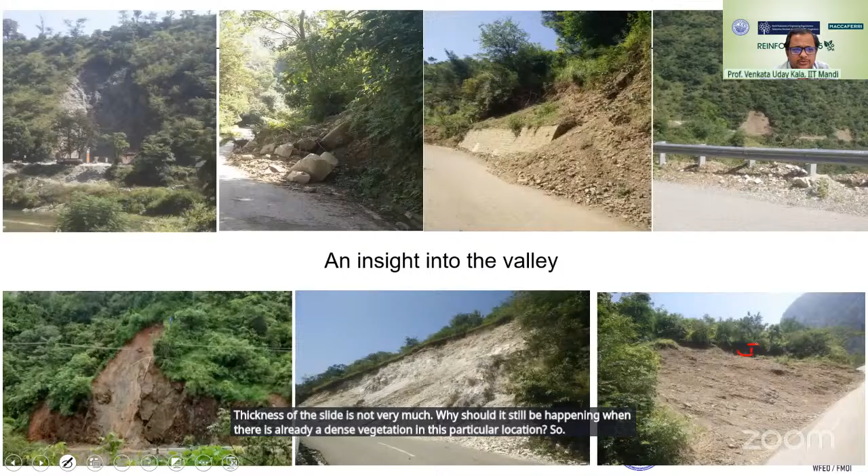So to dwell into this, we started looking into the literature. We started to understand, and it's a well-applied situation, that vegetation is definitely one of the major reinforcement processes in the soil, which helps the soil to be bound, located in place, and also controls soil moisture movement inside and outside the soil.

Then there are various methods which have been brought in under the name of bioengineering, about how slopes can be constructed using nature-based solutions, of different types. These three images, well published in literature, talk about the plant, the root, the branch, the leaves, and the association of how each of them contributes.

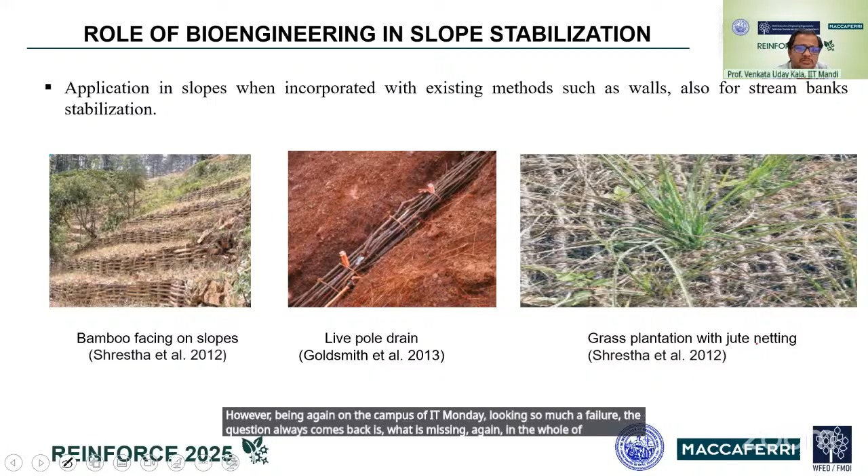However, being on the campus of IIT Mandi and seeing so many failures, the question always comes back: what is missing in this whole setup? That was the major objective, and when we looked into the literature, it clearly shows that there is something a plant requires from the soil, and because it is nature, the plant gives back something to the soil. In between, we talk about the life the plant is getting from the soil, and the strength which is coming back from the soil to the tree.

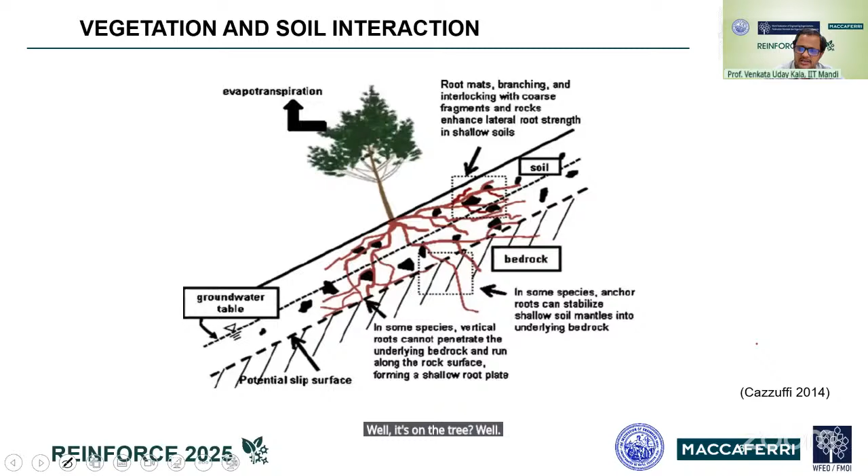Well, this is established, and a lot of people started to look at it. There are many root reinforcement models which started as far back as the 1960s and 1970s. People started to talk very much in the mechanics and scientific domain of how roots interact with the soil. Different models, different methods, different software, different options are available these days for the engineering. However, the concept we understood is how the part of nature-based solution is missing the part of engineering.

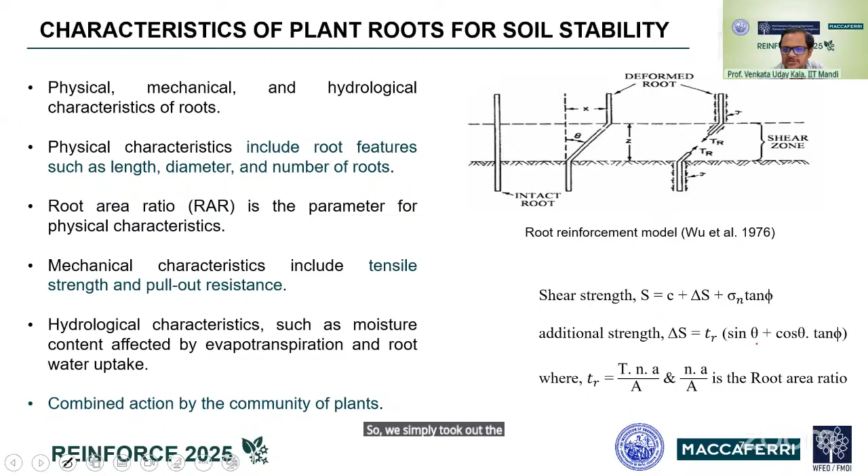So we simply took the same concepts of nailing and reinforcement, and we tried to see how that can be applied to different species of plants, and come to a concept of engineering to conform to bioengineering.

So we identified very indigenous plant species of the Mandi domain. I did not want to bring in species or plants from outside this particular area. I did not want to bring in the unnecessary aspects of invasion of different species. However, a few of them were already invaded almost 500, 600 years ago. That is very clear to those who know this domain.

I'm sure you are looking at these 18 plants and looking for one particular species called vetiver, which is missing from the list, or should I say, did not make it due to two constraints. Number one, vetiver is not a very regular or indigenous plant of this Himachal Pradesh region. Number two, thanks to NIDM and Professor Chandan Ghosh, he has given me almost 15 different types of vetiver species, which we have planted in our bioengineering botanical garden.

Unfortunately, none of the vetiver has given me anything better than half a meter of root. So the soil is clearly telling us not to bring vetiver here. I'm not ready to take it as a regular plant in this domain.

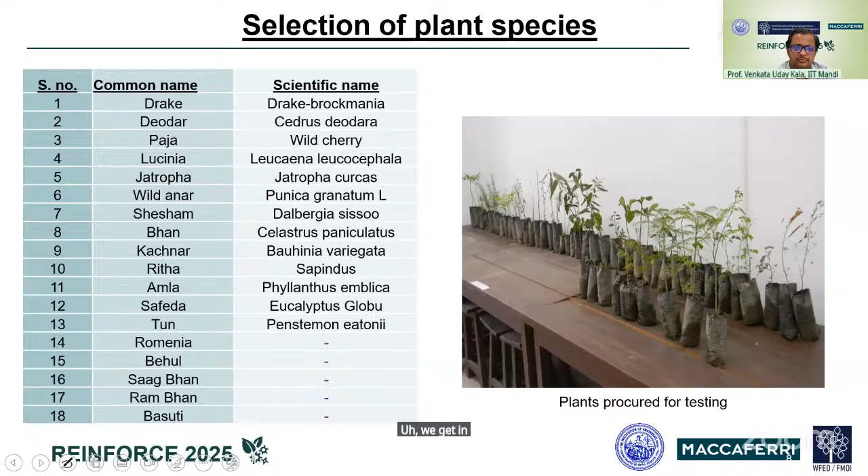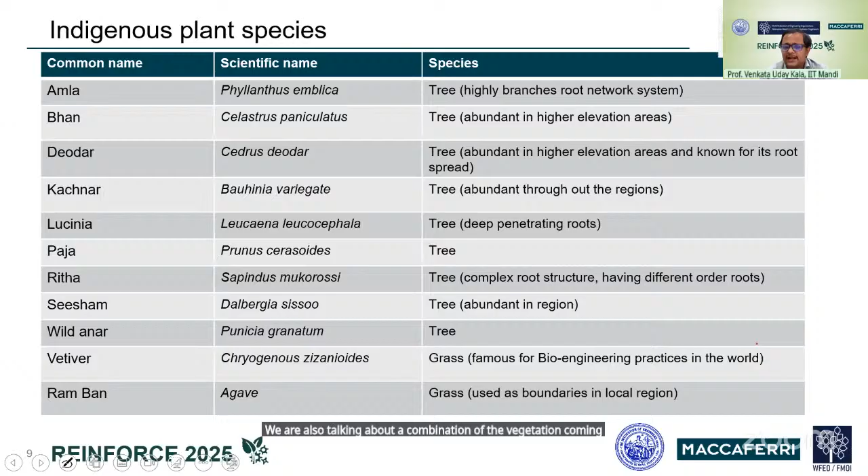So we continue with these particular 18 plants. We get the species, get the plants we have planted in our trees, and try to identify which type of species is more abundant and what type of structure it has. Fortunately, we are not simply selecting trees; we are also talking about a combination of vegetation coming in as grass, shrubs, and herbs in the whole of this expectation.

So we brought in the comparison between a soil nail and a plant root. When you look at it, a soil nail is very simple and easy given the conditions, since it has a fixed diameter.

The diameters are varying, not only varying in the structure, but also varying with respect to time, varying with respect to the location of the plant itself, availability of water, availability of geological conditions of the soil, and added to the environmental aspects, the roots change with respect to time and conditions.

Then they also have variable strength. It's not that the whole root gives you only one particular strength. The roots change their strength along their length. Orientation and shape probably gives you the best of conditions here, because it enters only into the void spaces and holds or grips the soil definitely better than a regular drilled or grouted nail condition.

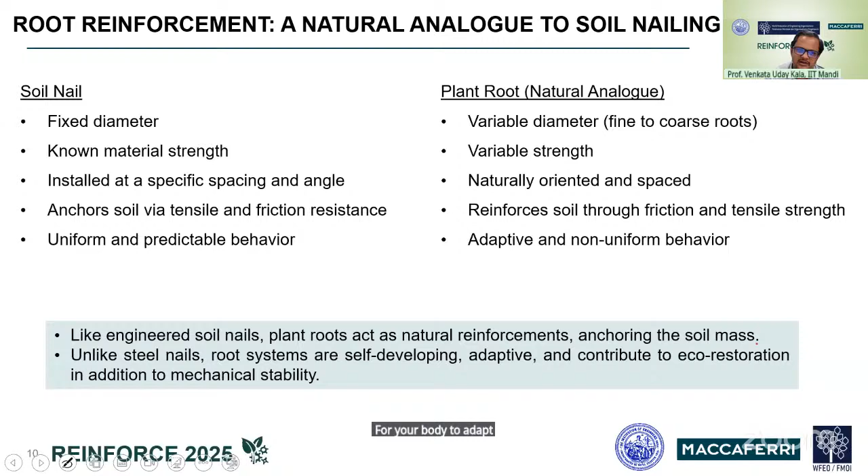However, I bring into the condition that when we talk about bioengineering, we are not talking about a reinforcement material or an embedded material, it is considered more a remedial measure. It is more like Ayurveda, where you need to spend that amount of time for your body to grow naturally, to adapt to the situation and give inner strength. That is exactly the concept we try to look into when we talk about the different roots and their structure to the soil and thereby the reinforcement.

We selected different plants, as we discussed in the last slide, with different diameters, different roots, different webbing culture, or the 3D structure if you look into this. And if you ask me what is the root diameter, then I have a number of diameters.

Some of the plants or species have a taproot, less taproot, higher taproot, more fibrous root, or no presence of any taproot at all. These are all natural, and it's expected that most plants which have a taproot or fiber root are going to continue with the same condition, unless some geological formation changes the look of the plant itself.

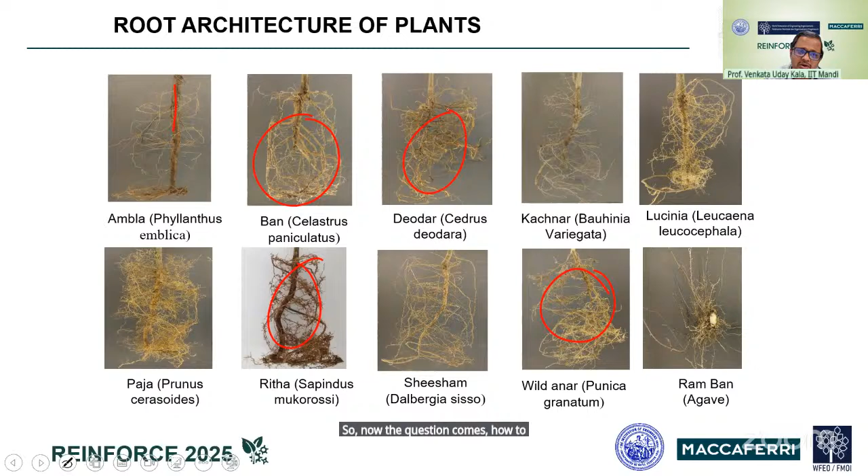So now the question comes, how to characterize or quantify these particular systems. By using the simple existing system, we understood that we are going to add a component of apparent cohesion into the system to see how the strength is increasing in the plants.

The research is ongoing, as we discussed, starting from somewhere around 1970, 1960 itself. It has already been discussed quite well in the literature, saying that RAR, what we call root area ratio, is a major factor, which talks about the architectural parameter. Whereas the strength of the plant or the root itself is a major component, which will also add strength to this particular component of shear strength. All these components are again well established in this particular domain.

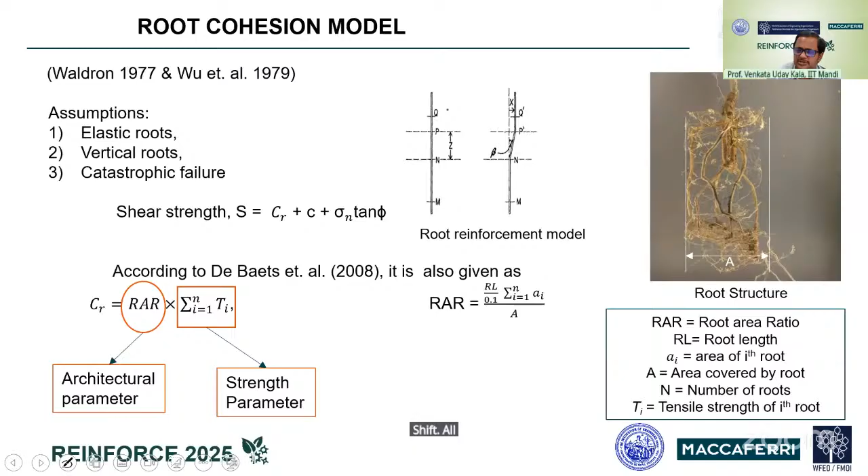If you just look into quick literature, I'm sure you're going to get a lot of idea on this aspect, where we talk about bringing this root in the soil in the lab, we try to disaggregate the different types of root, different diameters, different lengths, different grip lengths.

Then we use micro UTMs, trying to get the stress strain behavior of this particular material. And if you can appreciate this part, the error bar in all these sets for a given diameter, for given conditions, for a given strain rate is too high, because, as we are discussing again and again, it's a natural material and it has its own mode of failure and types of failure.

So we started to establish this particular aspect. Finally, when I look into different types of these systems or plant species, almost equivalent in number, when I'm trying to find them, they are definitely forming as a cloud, while only a few of the plants are giving me very high strength in this particular aspect. Whereas the maximum of the species are giving me a controlled cloud, what I call a very normal or mediocre strength. So we thought to understand how to develop this particular aspect.

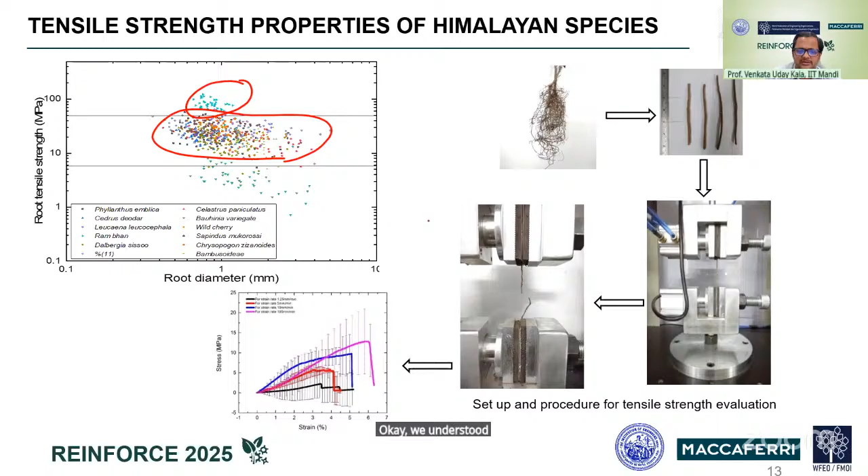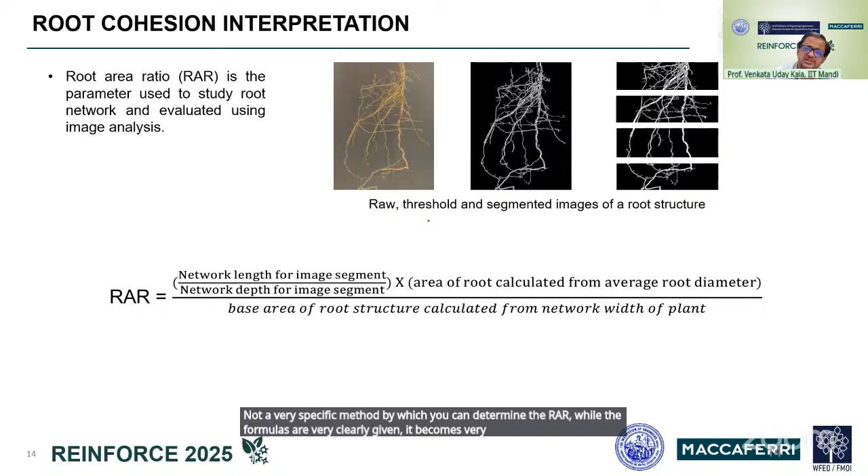The second aspect, strength, is okay. We understood the strength part of it, the variations and opportunities. The moment you come into this RAR, called root area ratio, it's difficult to get into a concept of diameter, so RAR has been introduced. Again, when we say RAR, we don't have a very specific method to determine it. While the formulas are very clearly given, it becomes very difficult, but thanks to image processing and improved image processing over time, we are now able to segment the image of a plant or root.

To understand how this root area is changing with respect to the structure, probably in the next slide you will get an idea why this is very important. So we also tapped into root area ratio, how much of the root can cover a particular area or domain when present inside the soil. Now going back to the De Baets 2008 option, we can quickly find out what is the improvement in cohesion because of the presence of the plant root, corresponding to what the soil already has as an inherent property. So this is an extra component added to the cohesion component of the soil.

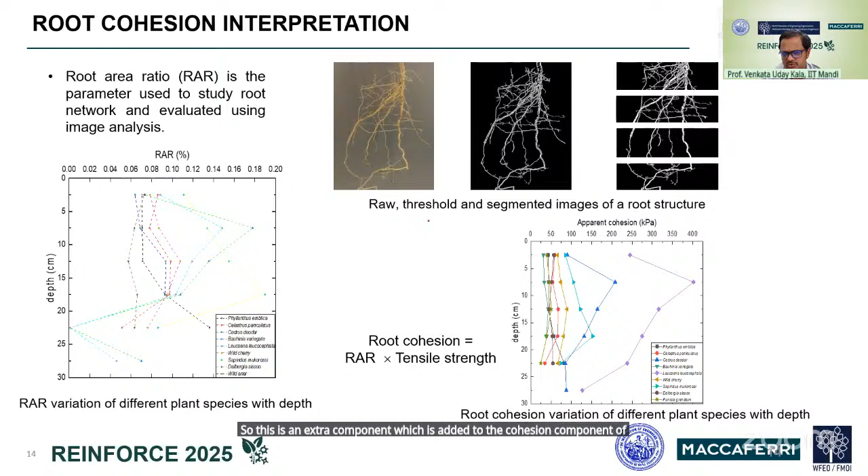So now when we look into the RAR profiles, a simple philosophical idea comes in: this RAR can tap a different opportunity or application potential. If the strength is not going much into the depth but giving slightly good strength decreasing over depth, I say this is more of a surface erosion or superficial application species. Whereas if it's increasing over depth, I see it as having a good opportunity of being a reinforcement material, the way we talk about soil nails. However, don't forget we cannot go to the depth a nail goes, so feasibility is a major aspect to look into before talking about this.

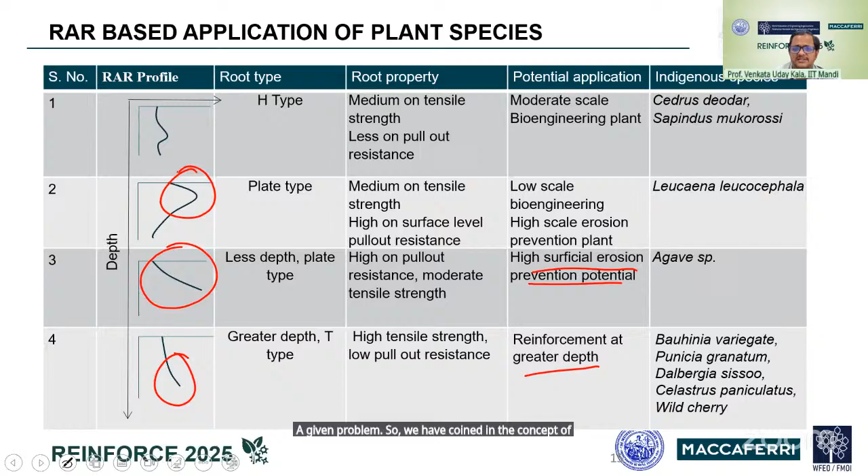So again, you can see some plants trying to give slightly higher strength on top, but the moment it goes down, it taps different conditions. So we have to understand it's not that a particular species is going to solve a given problem. So we have coined the concept of community of plants as we are moving forward. For this, we wanted to understand, rate, or rank a particular plant, how to choose that particular plant or species to make it more workable in this option.

So we try to rank the species based on two components: RAR and tensile strength. Undoubtedly, both combined give us root cohesion itself. So we can understand how much of that particular root and soil are contributing to the extra component of cohesion as root cohesion.

Based on this ranking, now we are coming to a concept that if this is the arrangement of the plant, if it can be planned such that higher tensile strength material goes in between, or a combination like we are trying to depict here. However, higher tensile strength plants are more present on the top and bottom line, and slightly lower tensile strength but higher RAR plants are present in this particular domain, where the root spread is also confined or controlled. So we are talking about a hybrid system which can be developed.

It's not that we are simply saying go and plant one species across the whole slope. We are talking about the condition of whether you can split the species so that we are maximizing the effort from this particular option. So we are trying to see how we can perform more numerical models by which this particular aspect can be strengthened, using the concept, going to experiments, and trying to find out.

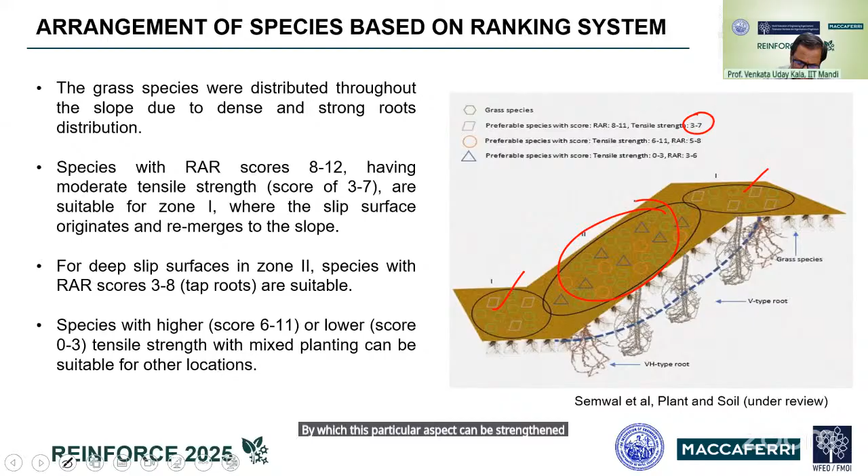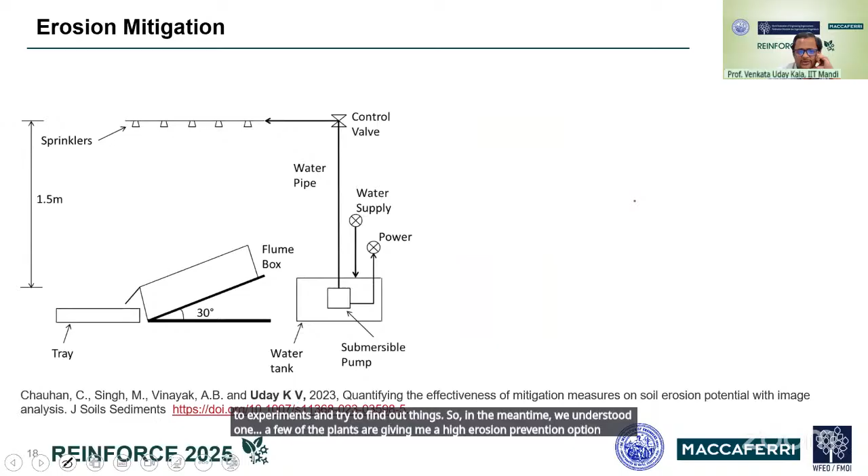In the meantime, we understood a few of the plants are giving us a high erosion prevention option, so we tried to catch the low hanging fruit. We brought in a simple erosion setup, trying to set up an erosion flume which gives us an option of segregating.

I used image processing to find the time rate of erosion happening on the site. By this, we can quantify that there are few conditions in this particular soil which are inducing splash induced erosion - the moment a raindrop falls on the soil, it loses from its place and goes on.

However, few of them, while not showing splash induced erosion, are showing runoff induced erosion, which means over time when the rainfall is continuous, you will see more erosion happening after a particular time. So we tried to split these two and see which particular material, especially the different grass species, matters in this thin or superficial condition.

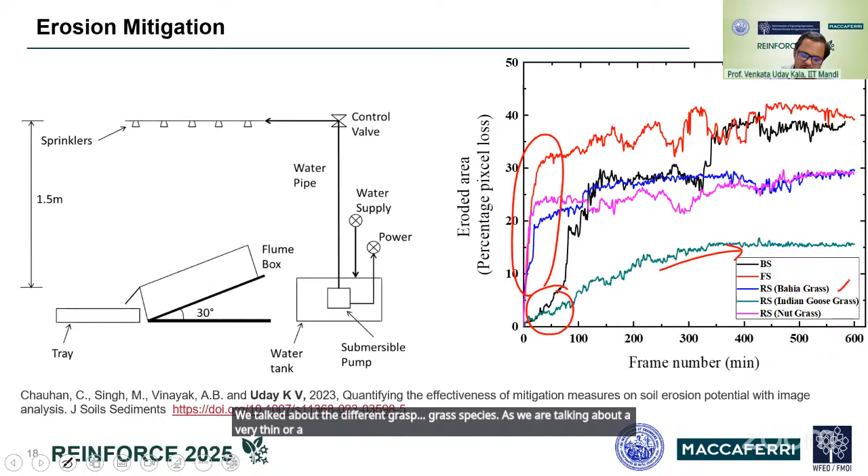We tried to quantify how bioengineering can control this particular condition, where initially the soil gave something around 4 kg of sediment at a given time and given rainfall conditions. The moment we started to use a simple fiber, we started to see a reduction in this material.

While going to the grass, we had two options. One is not to use leaves. So for this grass condition, I did not use the leaves, I simply used only the grass. I planted the soil in my flume and removed the leaves from the top.

Why am I doing this? Because probably it will come in the next stage. The simple cutoff is I want to still see the splash induced rainfall coming into the picture where there is no leaf, so the raindrop still has the same potential by the time it touches the soil layer. My grass is now acting as a reinforcement material only - I'm not stopping any energy going into the soil. So there I can see a quick reduction in the sediment.

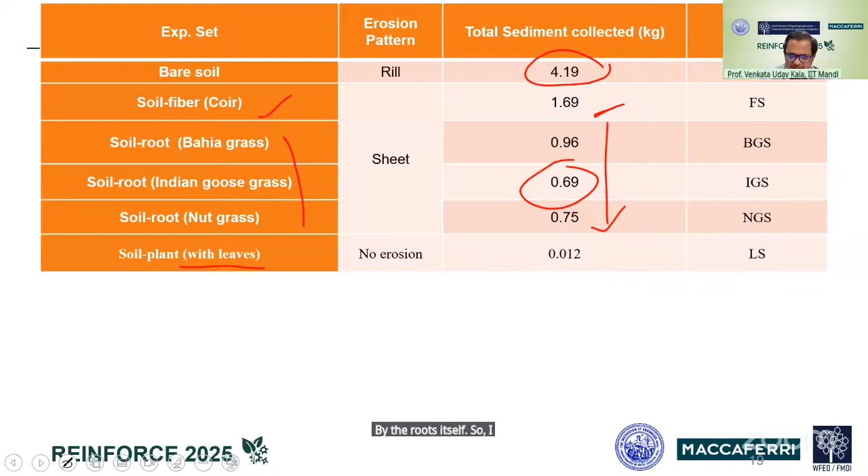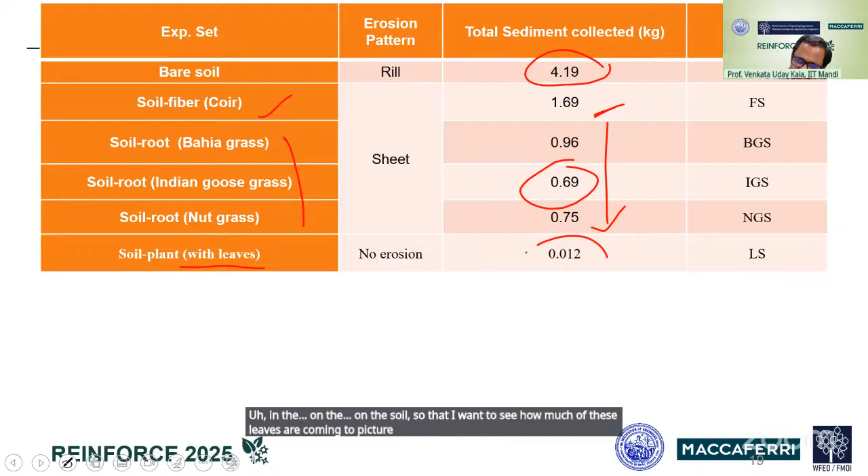What am I collecting in this domain? The moment I add the leaves for the given grass, say for example, Indian goose grass gives me the least erosion by the roots itself. So I allowed the leaves to be present on the soil, to see how much these leaves affect the picture, and the results are definitely spontaneous.

It shows that most of the erosion we now understand is coming from splash induced erosion itself. So we reduce the splash by using leaves, whereas runoff induced sediment is also reduced because of the presence of the grass itself. We have come up with this particular concept where you can very clearly see the changes across this thing.

However, I hope it's no point showing you an image with a plant or a leaf, because you cannot see any soil below, and the sediment itself clearly shows that erosion can be very well controlled using grass leaves - sorry, by a simple grass, which is a very common grass across India. I understand that is why it is called Indian goose grass, which is a very good option.

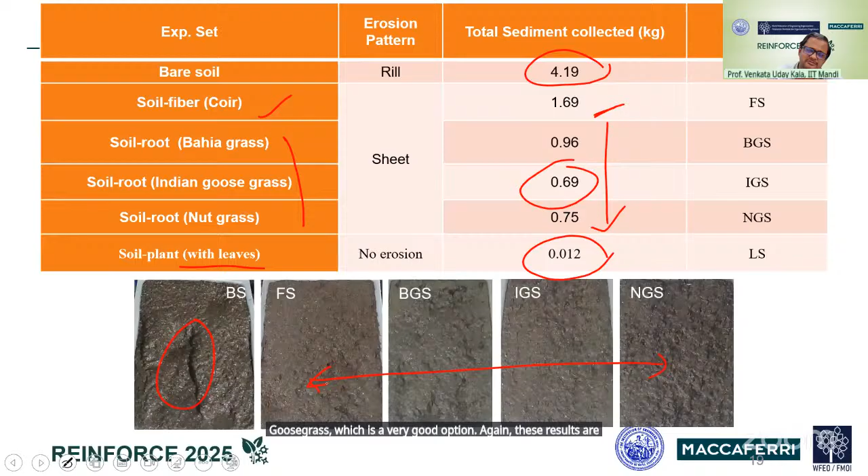Again, these results are confined to the amount of soil and the plants which you have selected for this particular study. Finally, if I have to conclude, what we have developed is the whole system of the plant working very well for reducing the effects or contributing to the improvement in soil strength.

Starting from the leaves, as I just told you, the leaf is the component which is looking at the soil and water balance, further avoiding the intensity of raindrops or absorbing the energy from the raindrops, so they don't reach the soil directly.

The remaining stem is the one which, at the surface level, gives me a rate of reduction where the soil or sediment transport will no longer happen because of the intersection of the stem at the interface. And finally, the roots act as a reinforcement system into the ground, trying to avoid the moisture coming in.

And before this, we also talked about the importance of different species getting into the picture to reduce the effect, or the efforts of the species to improve the strength of the soil and thereby reduce the surface or subsurface, shallow landslide conditions in these particular domains.

So this is what we have understood with the plants. Now, quickly, with the paucity of time, I'll move to the other topic, which I call biocementation.

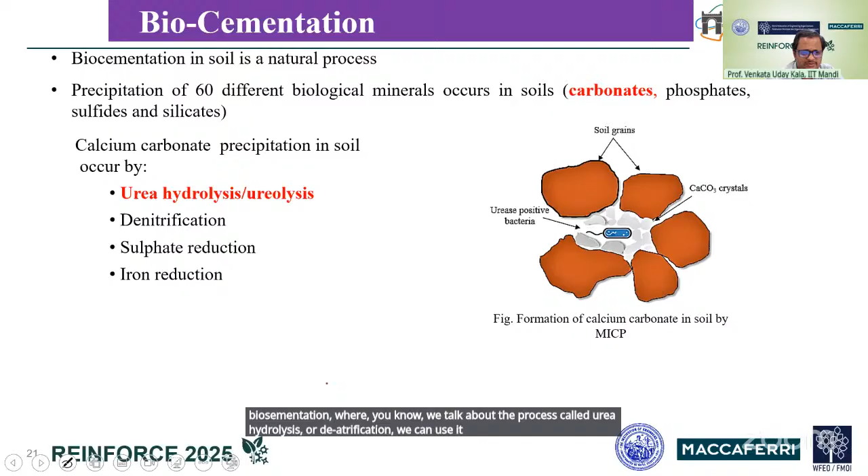These days biological or nature-based solutions include a lot of bio-based materials, thanks to improving biotechnology, which creates conditions where we can bring in species of bacteria or enzymes from the soils or the plants to make it more workable for us. So we started looking into biocementation, where we talk about processes like urea hydrolysis or denitrification. We can use it for sulfate reduction, and we can use it for iron reduction.

So we can treat the soil, or treat the problem of the soil, within the soil itself using this concept. People have been using these concepts for decontaminating soils and improving soil conditions. I'm sure you've seen videos of China treating deserts and increasing plant cover in the deserts, etc. So if you can treat the soil with a particular species of bacteria, you can improve the nitrogen content in the soil and give life to the soil. These conditions can be easily developed and solved. This is what we tried to understand.

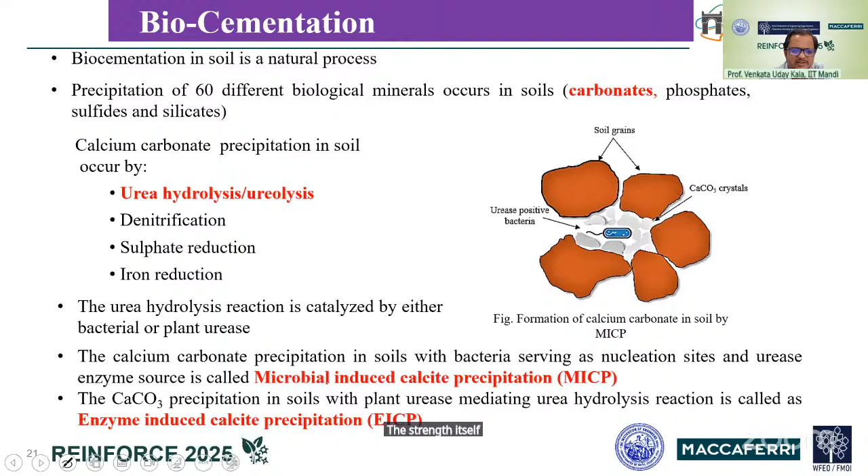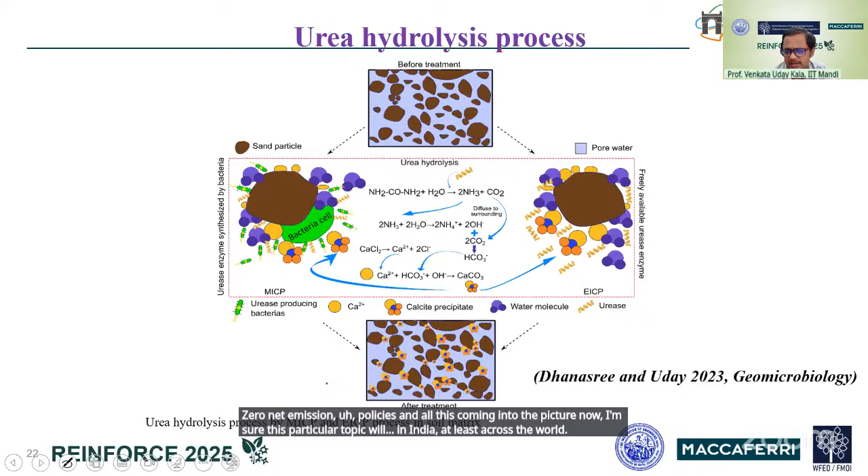However, I wanted to look into how these aspects of soil can improve the strength itself in the soil, which is what most geotechnical engineers look at for strength and stability. So we tried to understand how bacterial cells create a condition in the soil by which we can increase calcite precipitation - what we call cement addition or lime addition to the soil, which have become unsustainable given zero net emission policies. This topic will, in India and across the world, improve conditions where we talk about natural ways of releasing calcite, or in other words cement, directly into the soil without any process of hydration for strength gain.

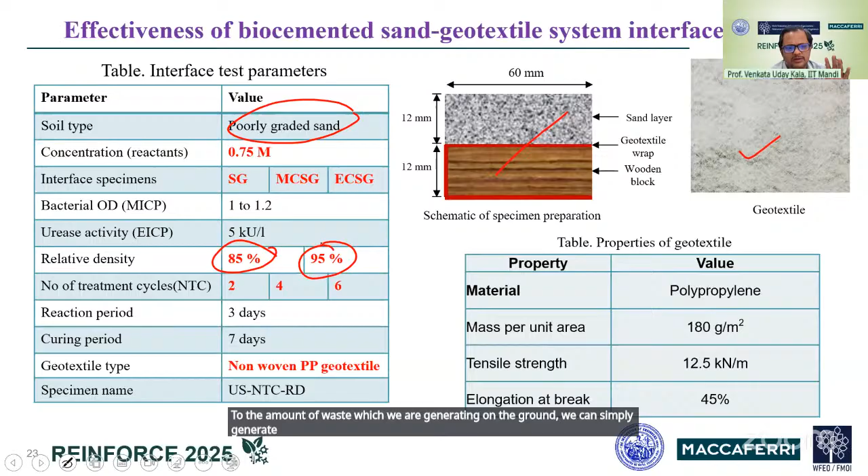So we took out the solutions and tried to understand how the bacteria creates conditions to release calcite directly into the soil. I applied the material to the soil grains and left it for some time so that calcification happens inside the ground. And we have different methods for this.

First, I choose to only quantify or look into the cementation in this. Second, I try to only look at the biocement in the geotextile. And third, I'm making it as a whole system, percolating the bacteria into the ground. So I'm talking about three options: independently geotextile, independently soil, and as a combination, trying to see how I can biocalcify the whole material.

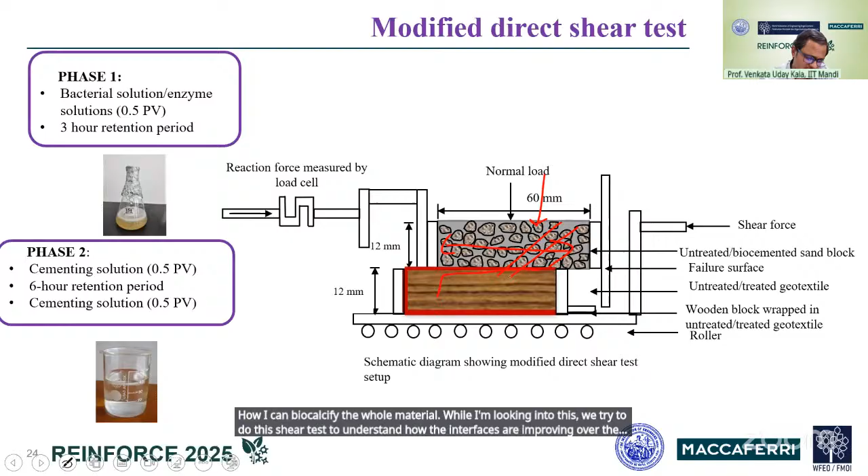While looking into this, we do shear tests to understand how the interfaces improve over time, before calcification, after calcification, and during calcification. We develop an interface like this. When shearing, you can clearly see the bacteria I put into the sand have started to make this sand into a mortar, improving the shear strength and interface conditions. We started with a poorly graded sand, which has now been converted into sandstone, improving the interface.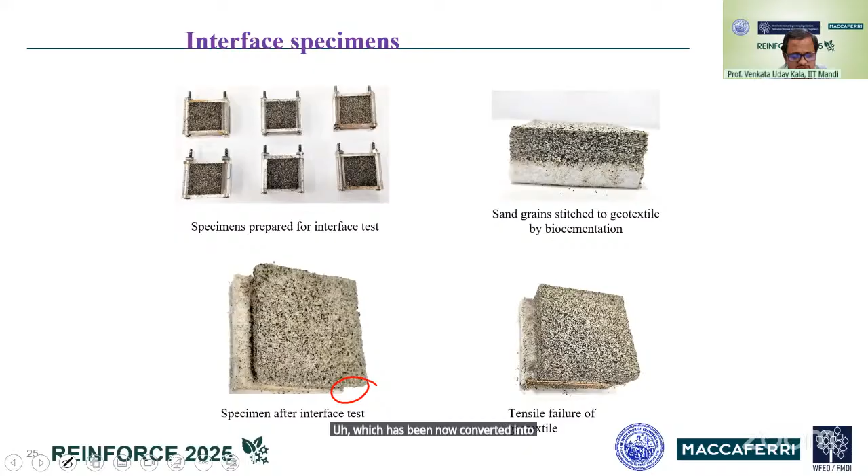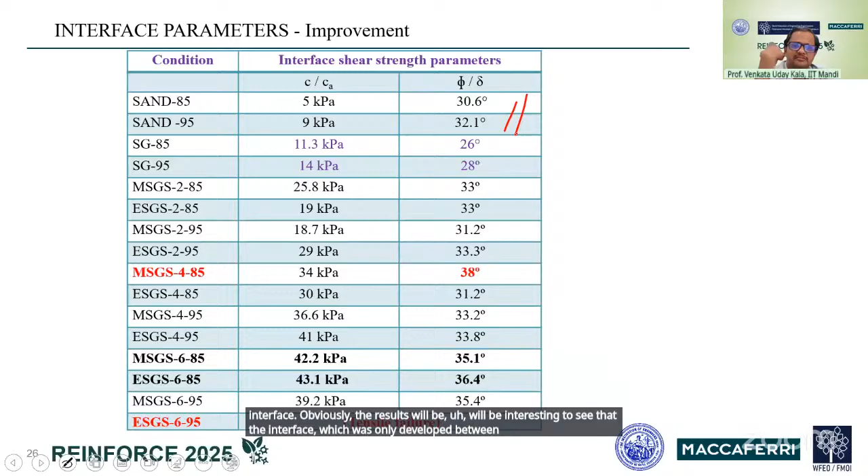The results are interesting: the interface between the sand was roughly 30 degrees. Don't mind, I'm talking about the peak interface conditions, so you'll see such high values, while values can be comparatively lower as we move down. However, you can see the increase happening from the 30 degree interface to almost 38 degrees as biocementation improves the condition.

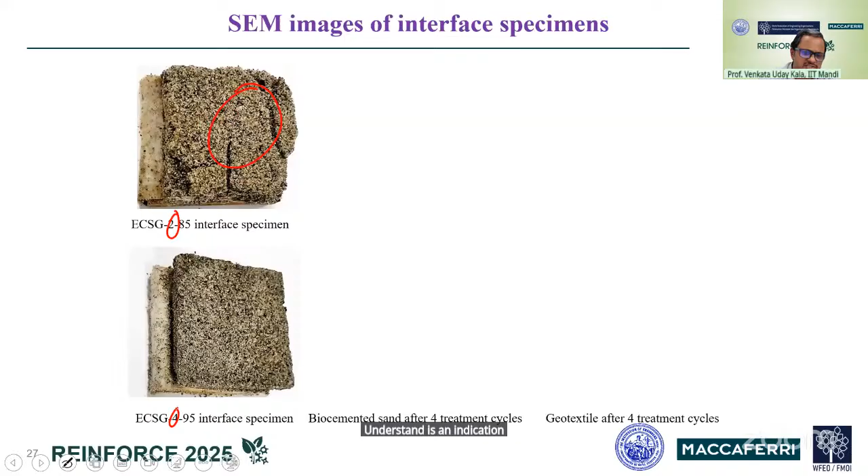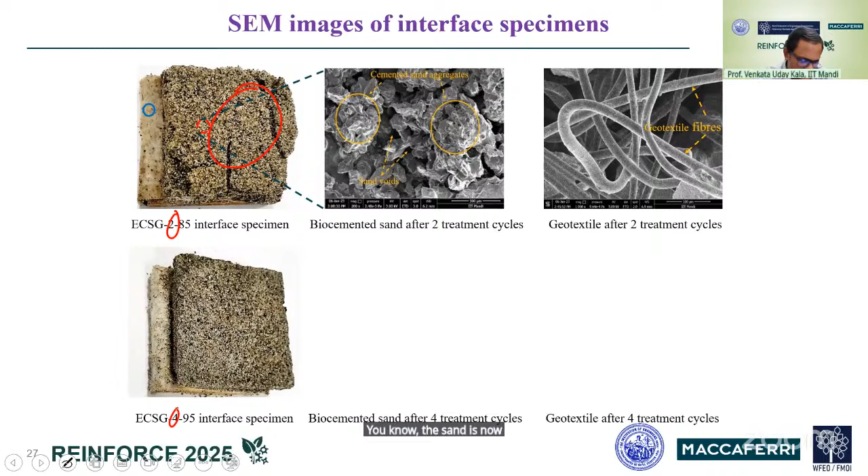Further, when you look into this interface and the type of failures you might see, the sand and soil interfaces clearly show this. For example, this is the place where I have a lower amount of calcium. If you are seeing 2, 4, 6, then 6 is the point where I have the highest amount of structure. These are the geotextile fibers seen on SEM. The moment you look into the biocemented sand, it is now coagulated, and you'll see a mortar-like picture.

Whereas if you see the same thing happening here, when I'm looking at the system itself, the bacteria started to also enter into the fiber and began to reinforce or bind the fiber itself. So now I'm talking about a stiff geotextile and stiff sand interacting with each other, which is where you saw the 38 degree interface at this cycle.

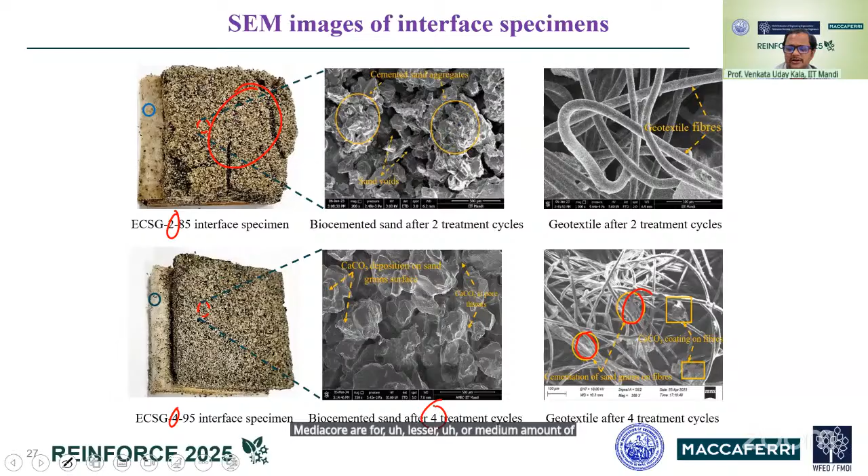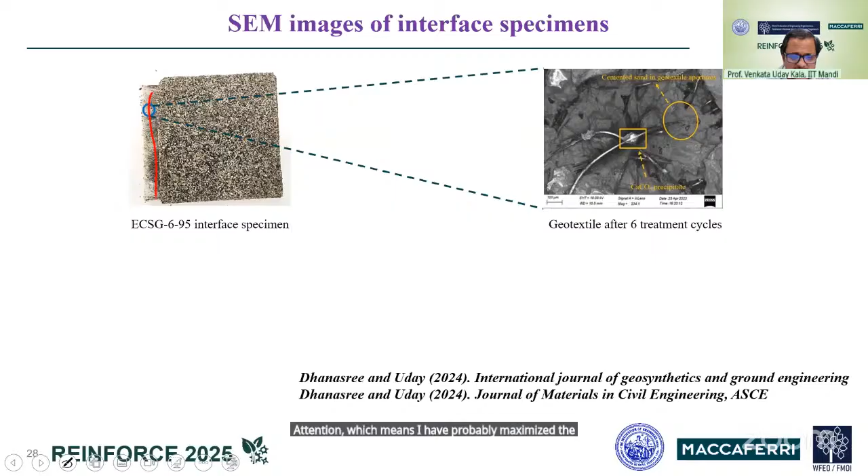When talking about a medium amount of calcite generated here, and then moving to 6 cycles, meaning the highest amount of calcite present in this experimental process, you can clearly see the geotextile now gives a tensile failure. Instead of the shear or interface failure, it has pulled the geotextile to fail up to the extent of tension, meaning I've probably maximized the interface condition, which we'll try to optimize further.

So the second option we quickly tried: it might be difficult in the field to put bacteria, soil, and all these conditions. So we tried to reduce this down to just the geotextile itself. We thought, can we play with the geotextile itself? We added some bacteria to the geotextile and treated it, and we could obtain a quick outcome where we made the geotextile slightly stiffer and rougher on the interface.

To be clear, this is not cement, this is bacteria, or just a bacterial or natural process in the field, so it is not going to give major effects from these treatments or processes. Leachate analysis and everything done clearly shows that the life cycle assessment of this material is still a very good sustainable material, because every process we're talking about is properly natural and purely degradable in nature.

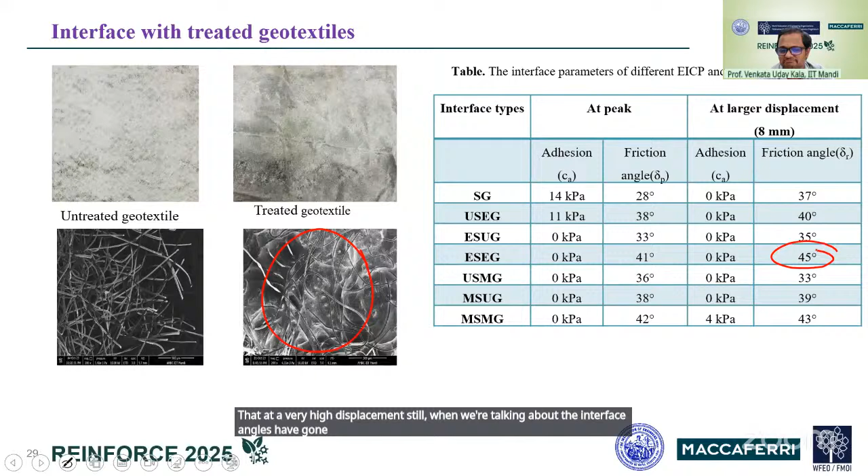So as we move forward, magic definitely happens at a very high displacement, when the interface angles have gone unbelievably to 45 degrees, at the point where the geotextile itself is coming under tensile pull because of the interface between the soil, the stiff soil, and a stiffer geotextile coming into the picture. So we are now trying to bring it to a condition where instead of geotextiles, can we bring in different materials, especially geogrids, to solve the same problem.

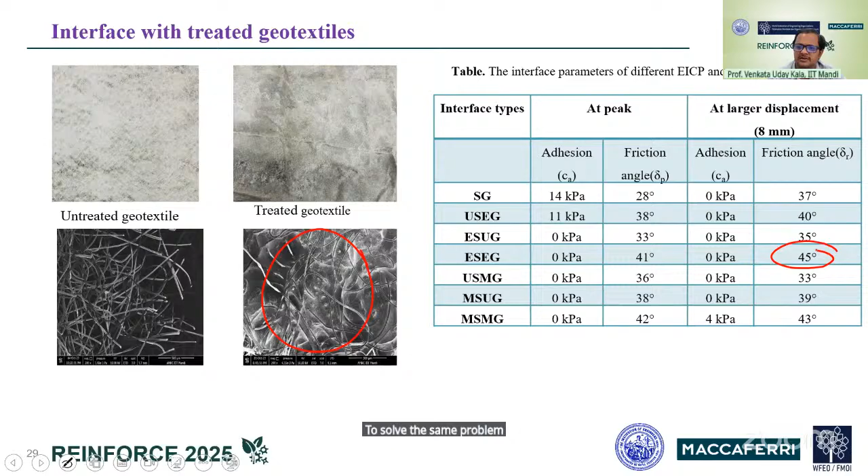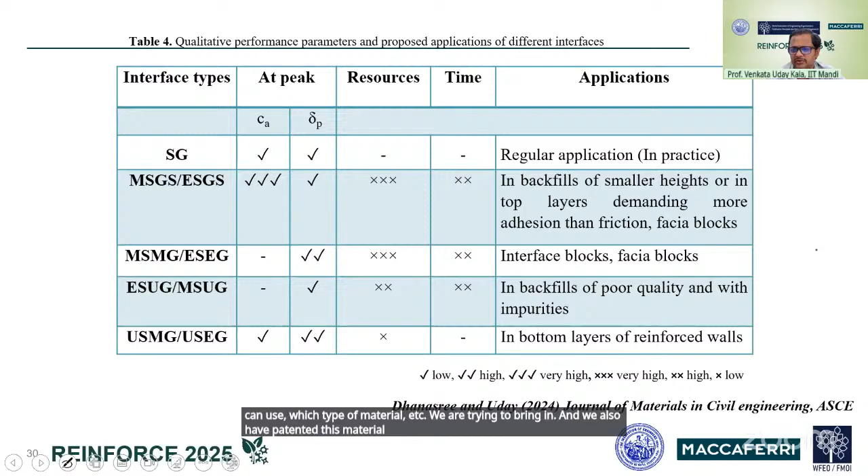Hopefully, when I get an opportunity next time, you should be able to see me publishing and looking at this particular material. So based on these applications, we also looked at how different applications can be brought in using the bacteria or the enzymatic solutions, which can help us see which levels and which type of material to use. We are trying to bring this in, and we have also patented this material, so that we can see how it can be further improvised as we go forward.

So finally, if I have to conclude my talk, we talk about nature-based solutions, both in terms of plant and bacteria, purely existing from nature, non-pathogenic in nature, and we are only trying to see how the natural material can help us improve the conditions we are trying to bring into the soil.

We discussed the point that root area ratio is one of the major parameters to look into for adoptability when it comes to selection of a plant species, whereas tensile strength, because it has so much redundancy, needs more confidence before we look at the applications and natural reinforcement as we move forward.

Calcite precipitation is different from cement addition to the same soil, because the calcite which we are adding is an extra addition, whereas when you add cement to the sand, you are adding extra material to the soil. When you talk about 2% or 5% cement added to the soil, we are talking about replacement of the material with cement.

However, in this particular option, I'm adding bacteria and enzyme, and I'm getting calcites. So try to understand the difference. Secondly, whatever calcite I'm going to get is going to be deposited only in the voids, not exactly on the grains. So it is not the same as what cement gives you.

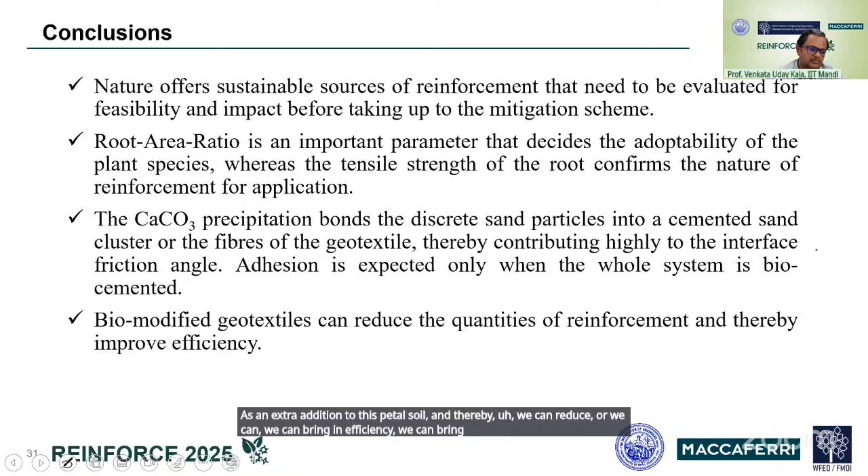Finally, instead of looking at the soil, if we can simply bio-modify the geotextiles, I'm sure this is going to become a more effective reinforcement and thereby improve efficiency by increasing the interface. I'm sure now we can reduce the quantity of geotextile or geomaterial which we bring in as an extra addition to the soil, and thereby reduce or bring in efficiency. We can bring in less extra material into the soil, and finally optimize the cost under given conditions.

A few references, which include also my papers, as a part of the work which I presented here.

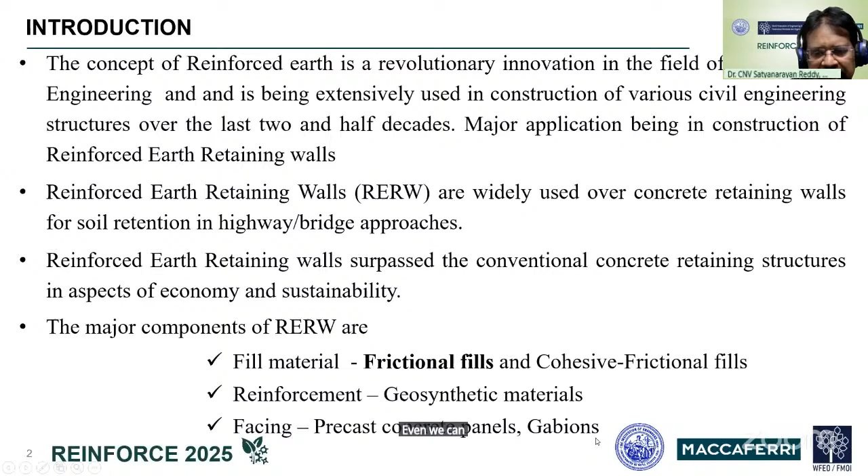Apart from fill and reinforcing material, the other component of reinforced retaining wall is the fascia wall. It provides local stability for the fill between reinforcing layers and gives aesthetic appearance to the structure. There is no special foundation laid for reinforced retaining wall except a leveling pad over which the fascia wall is erected. The fascia wall is formed using precast concrete panels, or even a gabion wall can serve as a fascia wall. So the major component of reinforced retaining wall is fill.

That's why fill is very important to us. The stability as well as cost of reinforced retaining wall depends mainly on fill material. Later, in design while proportioning, recall that the base width initial proportioning is taken as 0.7 times H, where H is height of backfill plus depth of foundation, taken as 0.1 times height of backfill to be retained. The minimum base width to be provided shall not be less than 3 meters.

The conventional fill materials initially used in construction of reinforced retaining walls are sand, morum (silty gravel), and subsequently, due to scarcity of sand, rock flour was also tried as fill material. Since fill is the predominant material, instead of depending on conventional materials becoming costly due to demand in other construction activities, it is better to explore industrial byproducts which meet the requirements for use as fill material. This will not only help in safe disposal of the industrial byproduct, but also help reduce the cost of reinforced retaining walls.

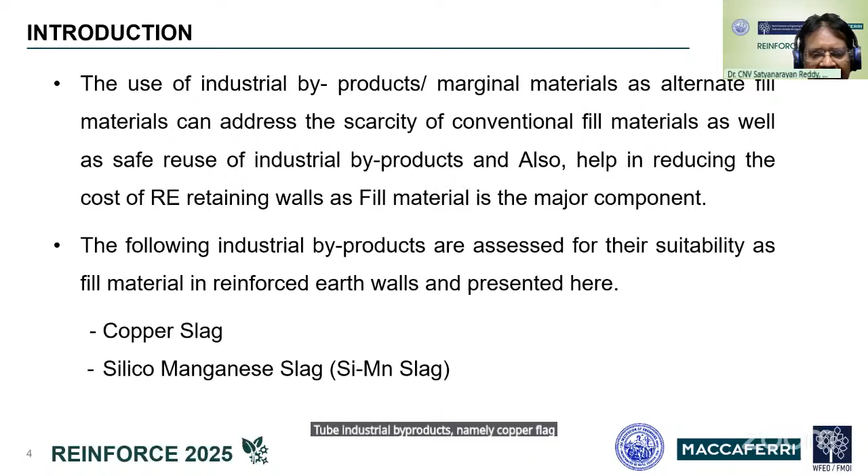Copper slag is a byproduct obtained from matte smelting and refining of copper. About 2.2 to 3 tons of copper slag is generated as waste for every 1 ton of copper produced. As of today, worldwide copper slag production is about 40 million tons, and in India, slag generation is up to 1.63 million tons.

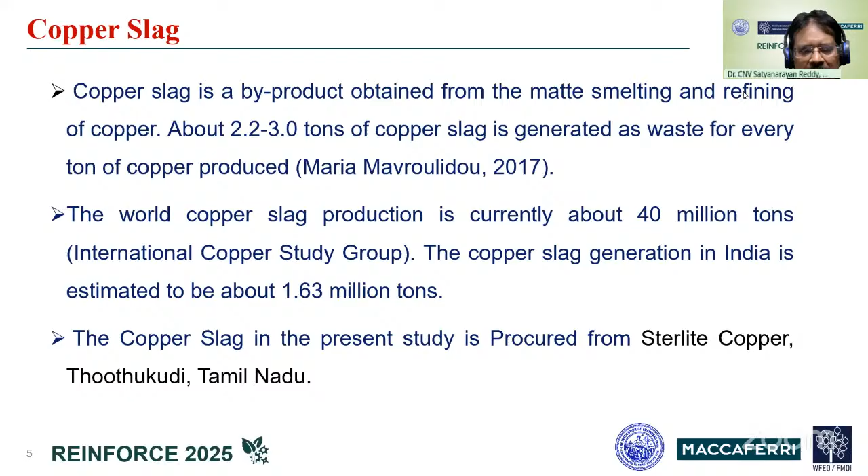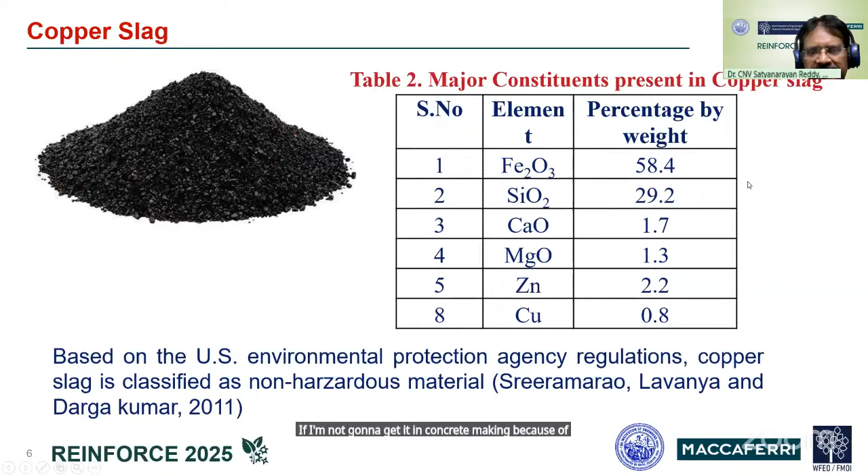The copper slag used in the present study is procured from Sterlite Copper, Thoothukudi, Tamil Nadu. Looking at the constituents present in copper slag, it contains ferric oxide of 58.4% and silica of 29.2%, with traces of CaO, MgO, zinc and copper. The US Environmental Protection Agency regulations have listed copper slag as non-hazardous material, and some researchers have tried using copper slag as substitute for fine aggregate in concrete making because of the presence of silica and ferric oxide. It is a granular material.

Industrial byproduct, that is silicomanganese slag. Silicomanganese is a ferroalloy used in improving mechanical properties of steel. This slag is generated during carbothermic reduction of raw materials inside submerged arc furnace. Huge amounts of slag are generated every year and it is directly dumped in landfills without any significant reuse. India is the second largest producer of this slag, about 3 million tons annually. This material, pulverized silicomanganese slag, is a granular material, and hence its suitability for use as fill material in RE walls and in concrete making has been investigated by few researchers.

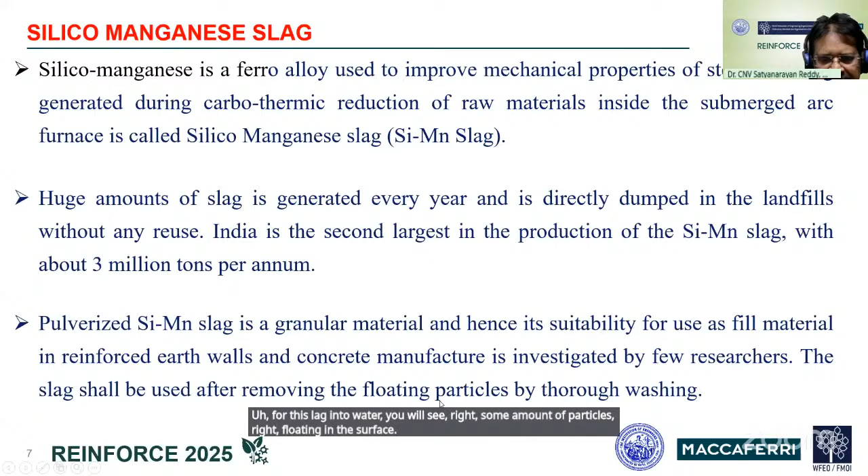Before using this slag, we need to remove the floating particles. If you pour this slag into water, you will see some amount of particles floating to the surface. So such material needs to be eliminated before using it.

The slag consists of, as you can see from the picture, irregular shaped particles with rough surface and voids as one combination, and other as solid crystals of dull white, bluish green and brownish green color. The material is lightweight and predominantly contains sand-sized particles. This silicomanganese slag has been procured from Abhijeet Ferrotech Limited, located in Atchutapuram in Visakhapatnam, Andhra Pradesh.

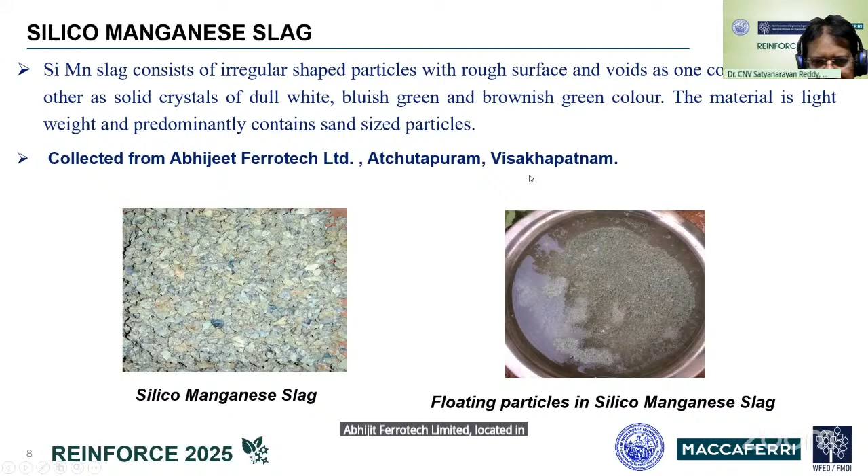Looking at chemical composition of silicomanganese slag, it contains Al2O3 of 18-24%, silica 36 to 38%, calcium oxide 14 to 16%, and manganese oxide 13 to 15%. Some of the leaching studies, long-term leaching, have reported leaching of manganese in small proportions, but such leaching is not a matter of serious concern. It is not toxic. Only thing is hardness of water will increase a little if water table is present at shallow depth. Except for that, there is not much toxicity associated with this material.

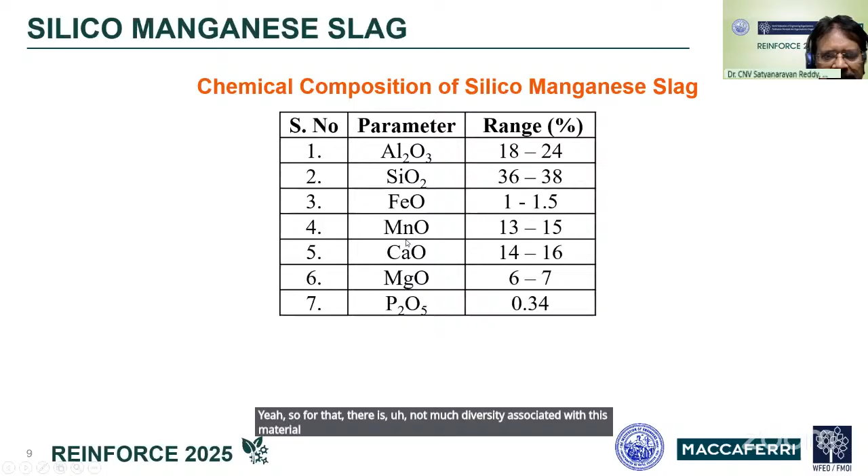In the present study, besides assessing copper slag and silicomanganese slag as fill material in designing reinforced retaining walls of varying heights from 4 to 8 meters, Moorum conventional fill material has also been considered, just to compare how the design requirements change with respect to these industrial byproducts in comparison to Moorum. The Moorum used in the present study contained 48% gravel, 38% sand, rest fines, and it is non-plastic material having a liquid limit of 20%, classified as silty gravel.

It has maximum density of 2.05, and its shear parameters in OMC MDD and saturated condition, in drained direct shear test, are reported. It has effective angle of internal friction of 33 degrees. When its interfacial shear parameters are assessed from pull-out test, it yielded values above the interfacial shear parameter obtained in the drained condition on the material itself. In such a case, we need to limit it to the same value, 33. By mistake it is typed as 35; it is limited to 33.

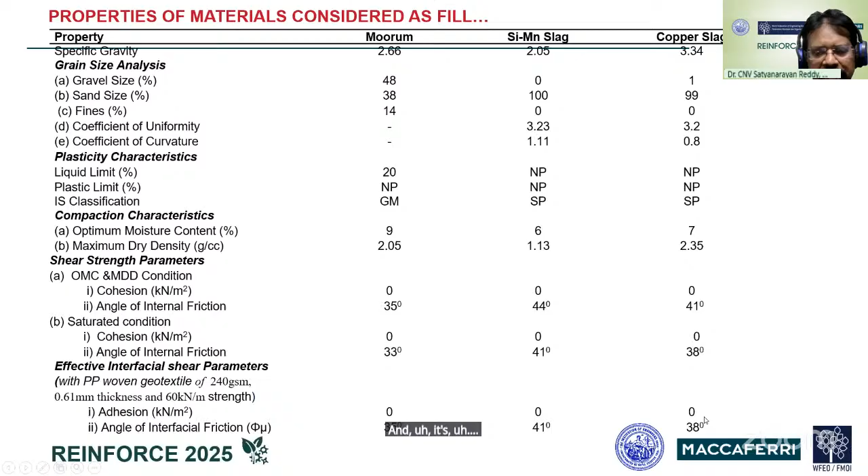Coming to copper slag, it is a heavyweight material. Specific gravity is higher than even Moorum, at 3.34. It also contained predominantly sand-sized particles, with a uniformity coefficient of 3.2 and CC close to 0.8, and the equivalent IS classification symbol is poorly graded sand, SP. Compacted maximum dry density was 2.35, and its angle of interfacial friction is 38 degrees.

Looking at the requirements specified by Jones for fill materials, with respect to frictional fill, our materials are frictional fills. Percentage fines shall be less than 15; we have only 0% fines for silicomanganese slag and copper slag. Angle of internal friction shall be greater than 25 degrees. Coming to CU, it is only just above 3, not above 5. CC, for silicomanganese slag greater than 1, and copper slag 0.8, close to 1.

So if you go by Jones criteria, you will feel the CU is 3, it cannot be used like that. So anyway, I will also show you IRC special publication requirements, and then we will assess.

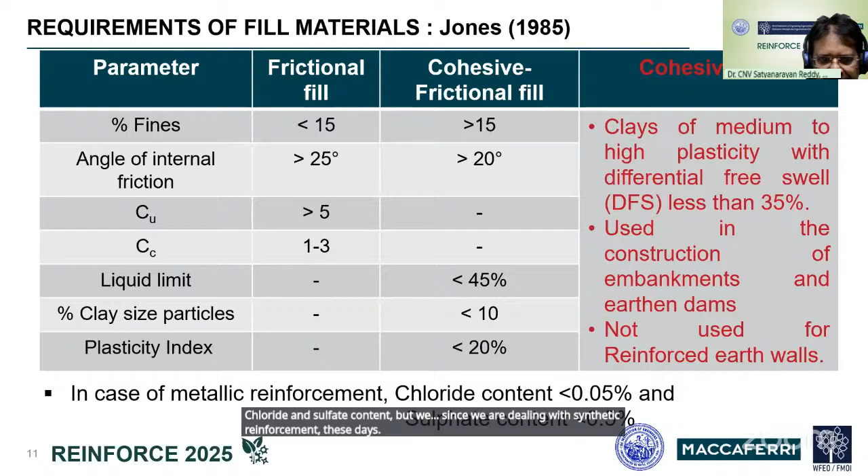If at all frictional fill is not available, then you can use material with fines more than 15%. For such a thing, Jones has given specifications. But anyway, for our case, frictional fill specifications are required. If we are using metallic reinforcement, then we should also look at chloride and sulfate content.

But since we are dealing with synthetic reinforcement these days, those specifications are not required. Coming to requirements laid down in IRC SP 102, you can see if a soil or material has percentage fines less than 15 and satisfies this gradation criteria, plastic index less than 6 - in our case it is non-plastic - and if CU is greater than 2, it recommends use as a frictional fill.

In case of soil, or any industrial byproduct granular in nature with percentage fines greater than 5 up to greater than 15, you should look at percentage of particles passing the 75 micron sieve. If it is less than 10, then check the plasticity index. If it is less than 6, and if the angle of internal friction is above 30 degrees, IRC recommends using it as fill material. As per IRC specification for CU, our materials are passing since the CU values are greater than 3.

So in the present study, design of reinforced retaining walls has been done, considering both external and internal stability mechanisms.

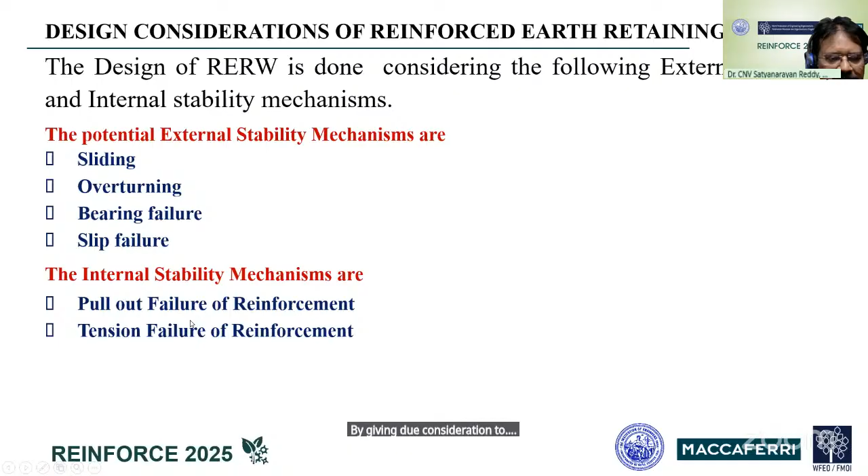So after getting satisfactory required factors of safety in external stability mechanism, the reinforcement tensile strength and length of reinforcement, particularly beyond the rupture plane within the reinforced earth fill, have been arrived at by giving due consideration to pull-out failure of reinforcement and tension failure of reinforcement.

External stability involves consideration of the reinforced structure, that is the RE wall as a whole, as a rigid body, checking its stability against sliding, overturning, bearing failure, and slip under the effects of backfill thrust, dead loads, and other loads. Coming to internal stability, it involves considering internal mechanisms, namely tension and pull-out failures due to shear within the reinforced earth wall.

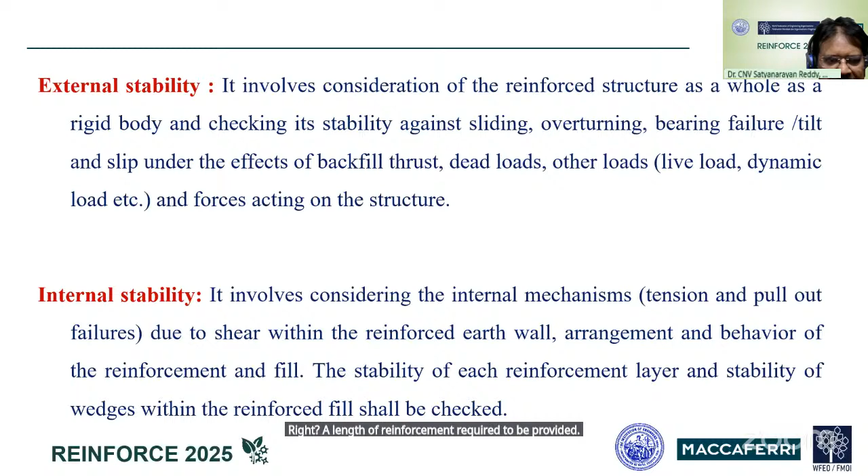So accordingly, it deals with the arrangement and the requirement of tensile strength, and the length of reinforcement required to be provided for internal stability. Those aspects we will be dealing with.

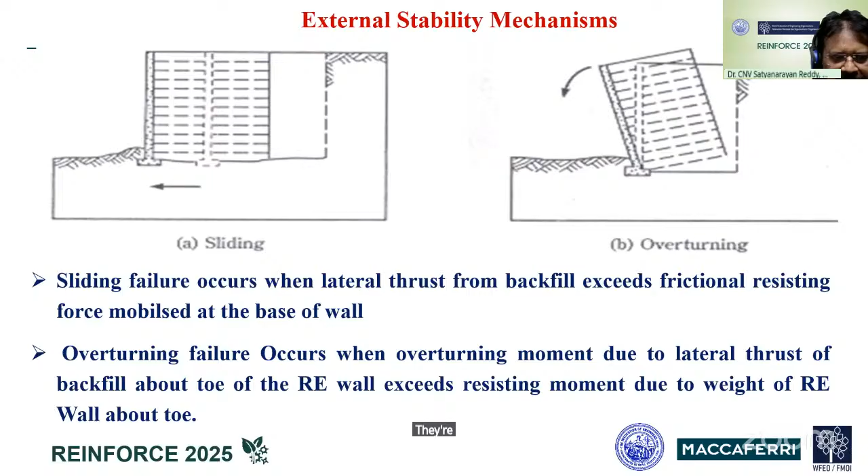When sliding occurs, when lateral thrust from backfill exceeds the frictional resistance mobilized at the base of the wall, sliding failure will occur. Overturning failure takes place when the overturning moment caused by lateral thrust from backfill exceeds the resisting moment available due to self-weight of the wall, it will overturn. So generally we maintain a minimum factor of safety of 2 against overturning failure, and against sliding failure a factor of safety of 1.5.

Coming to bearing capacity failure risk, we determine the base pressure distribution, either trapezoidal base pressure distribution, due to the resultant vertical loads and the moment caused by lateral thrust, due to direct compression and bending. Due to moment, you will have higher base pressure near the toe and lesser pressure at the heel. If it is overstressed, if Qmax exceeds safe bearing capacity, there will be differential settlement and it may tilt.

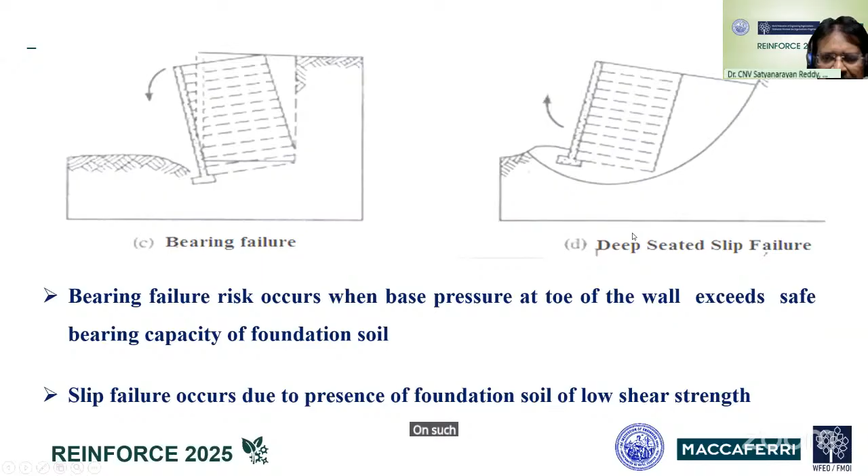Whenever you are constructing an RE wall on soils of low shear strength, you may anticipate deep-seated slip failures. This requires doing stability analysis with a number of trial slip circles and establishing the critical slip circle as the one having the least factor of safety. On such critical slip surface, we should have a minimum factor of safety of 1.5 for long-term durability.

Coming to internal stability mechanisms, within the reinforced earth wall we consider the rupture plane. Practically the rupture plane will be curved, but in analysis, when we do it by tieback wedge analysis using Rankine's theory, the rupture plane is taken to be planar, replacing the actual curved one.

That rupture plane separates the reinforced soil mass into a sliding zone and a stable zone. If tension is induced in reinforcement layers due to lateral pressure transferred by the fill on the back of the fascia, that tension pulls the reinforcement. If the length of reinforcement available beyond the rupture plane is small, then when the induced tension exceeds the frictional resistance available on both sides of the reinforcement, it will get pulled out. So when pull-out of reinforcing layers happens, the sliding wedge along with the pulled-out reinforcement will move.

If the provided base width of your retaining wall is more, that means the length of reinforcement is more, and if the length of reinforcement beyond the rupture plane is large, you will have high frictional or pull-out resistance available. If you use reinforcement material with low tensile strength, there is a possibility it will break - this is called tension failure. So in design, we take care of pull-out failure by maintaining adequate bond or anchorage length for reinforcing layers beyond the rupture plane, and we also adopt the ultimate tensile strength of reinforcing material such that tension failure does not happen.

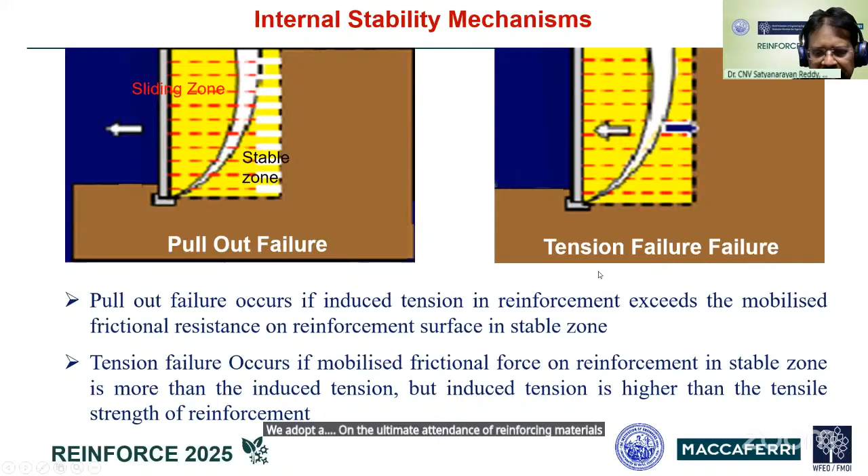Design of reinforced retaining walls has been done for backfills of height varying from 4 to 8 meters as per British Standard 8006 Part 1, 2010, using Moorum as fill material, and also designs are carried out using the byproducts under study - copper slag and silicomanganese slag - for both non-seismic and seismic conditions.

The backfill material considered in the study was the locally available soil at Andhra University, that is silty sand, which has a dry density of 1.82 gram per cc. Saturated density works out to around 2.1 gram per cc, taking specific gravity as 2.66. It has an angle of internal friction of 31 degrees. A uniform surcharge of 24 kilonewton per meter square has been considered acting on the wall for design.

After preliminary proportioning, that is by fixing depth of foundation as 0.1 times height of the backfill and adding that to height of backfill, you get capital H. Then base width is fixed as 0.7 times H, subject to a minimum of 3 meters. As per that clause, preliminary proportioning is done, and width of the retaining wall is nothing but width of the reinforcing layers - generally we take it like that.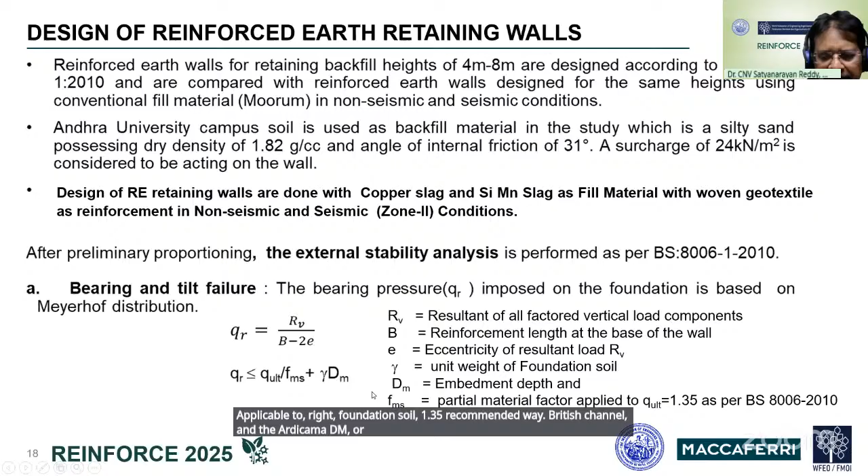Eccentricity is determined as the ratio of overturning moment to the factored vertical loads - even for moment, if you are taking one thing as factored, other things should also be taken as factored. Then we need to compare this with safe bearing capacity as per the procedure suggested by British Standard. We calculate safe bearing pressure on foundation soil as Q ultimate by FMS. Q ultimate can be determined as per our Indian Standard 6403. You divide that by the partial safety factor applicable to foundation soil, 1.35, recommended by British Standard, and add gamma D for overburden depending upon the depth of foundation provided for your wall.

Similarly, safety against sliding is checked by considering soil-to-soil contact and ensuring that Fs times RH is less than or equal to RV times tan phi dash by FMS, where RV is the resultant vertical load. Tan phi dash is nothing but mu, the coefficient of friction. We apply a partial safety factor of 1, as suggested by British Standard. The second term does not arise because our materials are frictional materials with no cohesion, so it is immaterial. The partial factor against sliding specified in British Standard is 1.2. So if you calculate RV times tan phi dash by FMS, and compare it with 1.2 times the disturbing force...

That is horizontal lateral thrust coming from backfill, right? If you satisfy this criteria, Fs into RH less than RV times this, you can say your proportioning is safe.

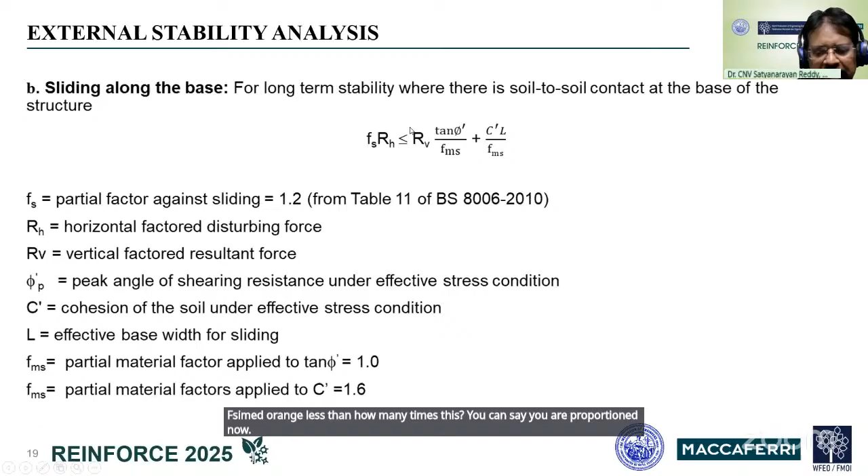Next, coming to internal stability analysis, as you know, there are two methods, namely tieback wedge analysis and coherent gravity analysis. In our study, we have used tieback wedge analysis.

Tieback wedge analysis assumes Rankine's equilibrium condition, and thereby we take the inclination of potential failure plane or rupture plane to be inclined at 45 degrees plus phi f by 2, where phi f is angle of internal friction of fill.

This rupture plane separates reinforced fill into active and resisting zones. In Rankine's theory, the coefficient of active earth pressure is taken to be constant at all depths: 1 minus sin phi f by 1 plus sin phi f.

Here we assume the fascia wall to yield about the base so as to mobilize the active conditions on the back of it.

So in internal stability analysis, I need to determine the tension induced in each of the reinforcing layers. Suppose if you take a reinforcing layer here, the tension induced in this layer is due to lateral pressure acting on the back of the fascia wall.

So for that, if you know the vertical stress here, you multiply accordingly.

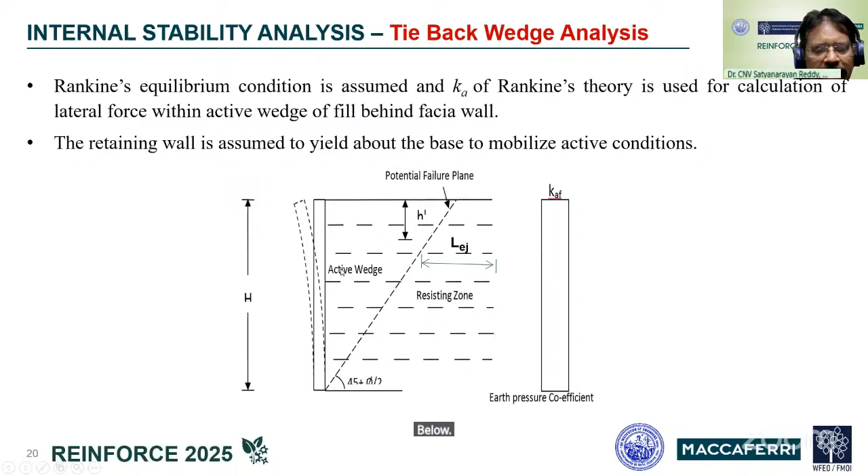In tieback wedge analysis, to ensure safety against tension failure, after determining the tension induced in each layer, we should see that the ratio of design strength by partial safety factor accounting for economic ramifications of failure shall be greater than Tj.

It should be satisfied for all the layers. And to avoid pullout of any of the layers, we should have adequate surface area at top and bottom of the reinforcing layer.

In case of sheet and grid layers, we calculate per meter run. So surface area is the total horizontal width on top and bottom faces multiplied by 1.

So, the required top and bottom surface area, mobilizing frictional resistance, shall be greater than Tj by the term in the denominator. Here also the second term does not arise.

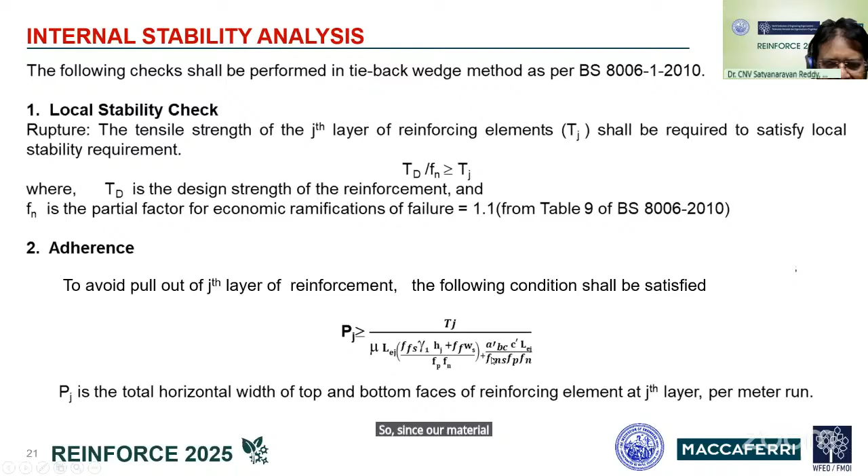In fact, the term in the denominator is the pullout resistance contributed by friction and by cohesion. When there is interaction between reinforcement and soil, we should not say cohesion, but adhesion. Since our material is frictional fill, the second term is not there.

So various parameters associated with calculation of pullout resistance due to overburden pressure and surcharge due to dead loads is given below, along with the various partial safety factors that are to be applied.

Here, LEJ is the length of reinforcement beyond the rupture plane where the pullout resistance acts. It's not the full length of reinforcement in the RE wall; you have to take the length of reinforcement extending beyond the rupture plane.

So after ensuring the safety of reinforcement against pullout for individual layers, generally for pullout, the topmost layer is more susceptible. For tension failure, since the vertical stress acting on the bottom layer is more, the lateral pressure acting on the fascia wall inducing tension will be large.

That's why the bottommost layer is more prone to tension failure.

In addition, we need to do the wedge stability check. In this, we consider various potential failure wedges and whatever reinforcements fall within those wedges. We calculate the tensions induced in those layers and sum them up.

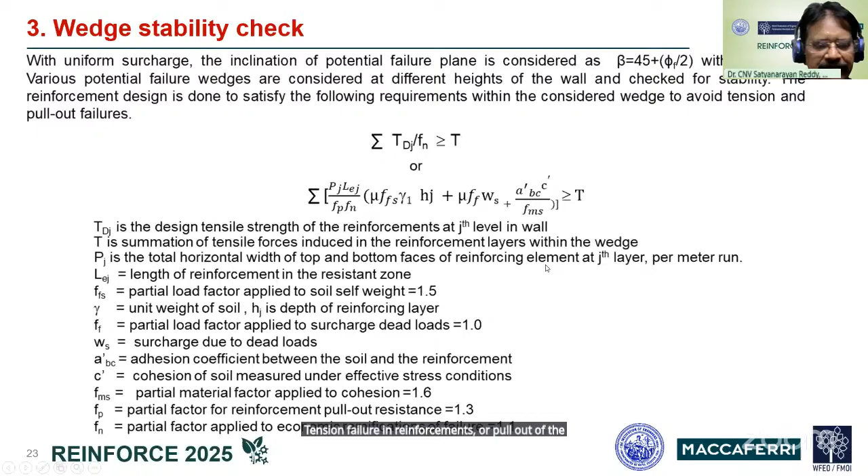So coming to calculation of induced tensile forces. Tension is induced due to self-weight of fill and surcharge. If any dead load is acting on the surface, due to that also you need to calculate. So anyway, in our design, we have calculated only tensile force due to self-weight of fill and surcharge.

So in a reinforcing layer at a certain depth, let us say that layer is the jth layer. The tension induced in that layer you can determine as the vertical stress acting at the level of the reinforcing layer multiplied by the coefficient of active earth pressure. Here it should be specifically KAF, coefficient of active earth pressure of fill material, and you need to multiply this lateral pressure with the area extending half vertical spacing above and half vertical spacing below, since per 1 meter length we calculate. So we need to multiply this lateral stress acting on the back of the fascia with the area of influence of the layer under consideration.

Here the vertical stress is calculated resulting from self-weight of fill and the uniform surcharge considered. So sigma Vj you can calculate at the level of reinforcement using Meyerhof's pressure distribution, using the relation Rvj by Lj minus 2Ej. Here Lj is length of reinforcement under consideration. Generally, length of reinforcement will be equal to width of reinforcement at the retaining wall. Eccentricity you need to calculate by dividing overturning moment with the resultant vertical load acting at that reinforcing layer.

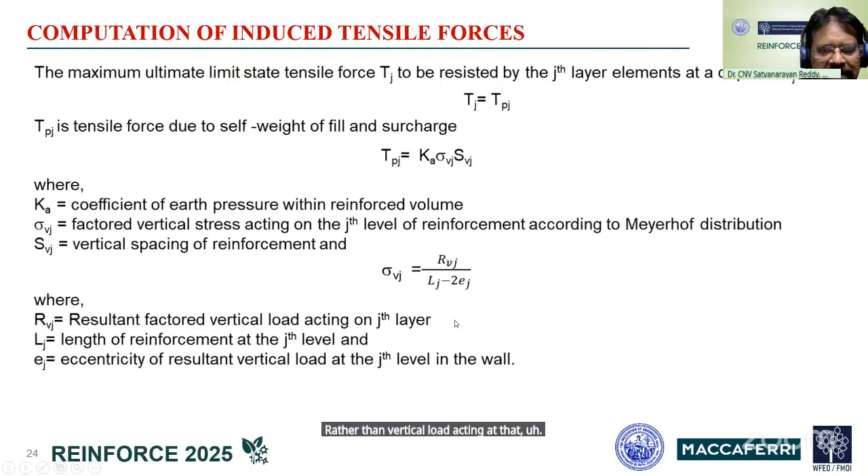It is determined using the seismic coefficient method for zone 2 — beta into I into alpha. And from that formula, by substituting the value of beta, I, and alpha, you'll get alpha h. Using the Mononobe-Okabe expression for coefficient of active earth pressure in seismic condition, you can calculate what is the dynamic thrust.

You can calculate what is the dynamic thrust. 50% of this will be added to the inertia force, in addition to the static force which you have due to backfill pressure.

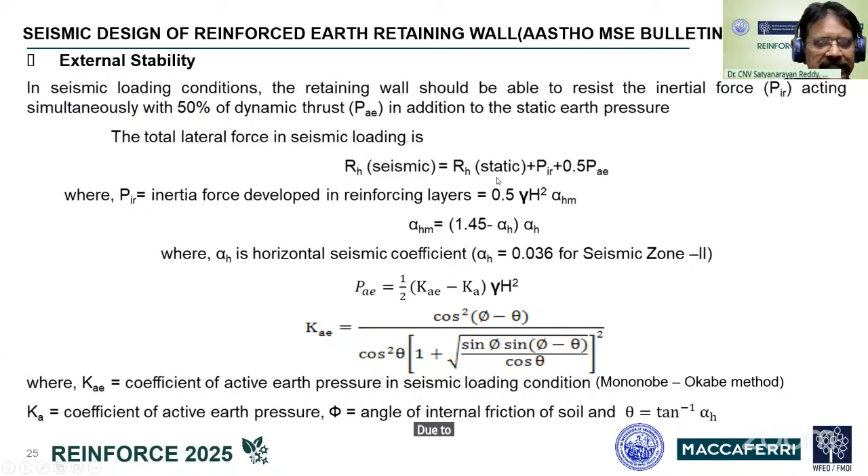So coming to internal stability, the induced tensions in reinforcement layers will also increase due to inertia forces. So in addition to the maximum tensile force which you get from the static analysis, non-seismic condition, you need to add delta TMD, where delta TMD is determined as the total inertia force divided by the sum of reinforcement lengths beyond the rupture plane from all layers, multiplied by the layer under consideration. The total inertia force is calculated by multiplying the weight of the sliding wedge, that is weight of soil wedge in the active zone, with the mean horizontal seismic coefficient.

So while determining the pull-out resistance from the fill onto reinforcing strips in the anchored zone, that is beyond the rupture plane, generally the resistance will be reduced by 20% because there will be vertical accelerations and thereby some reduction in vertical stress. So R seismic will be taken as 0.8 times R static.

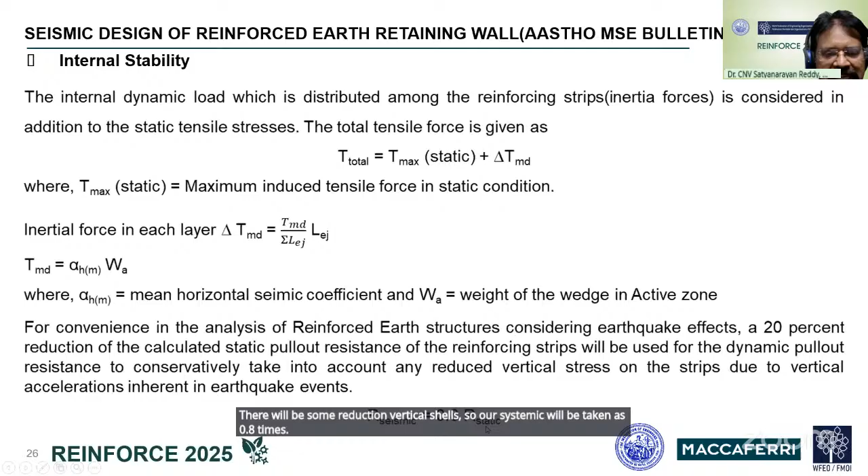So here I am presenting the details of design carried out for backfills of varying height using 3 different fill materials. One is conventional Moorum, the other 2 are industrial byproducts. So you can see from these slides, the factor of safety against overturning is always very high.

So even if you do not check, it doesn't matter, but there is a case where you need to check, where it may fail — I will tell that. So if you look at induced bearing pressure, for a given height, let's say 4 meters, 245 kilonewton per meter square is the induced base pressure. Copper slag is inducing 262, whereas silico-manganese slag is inducing 204. So silico-manganese slag usage for retaining backfill of given height will induce lesser bearing pressures. So even if you have soil with relatively lesser bearing capacity, you will be able to construct an RE wall. Compared to conventional retaining walls, the requirement of bearing capacity for reinforced earth retaining walls is less.

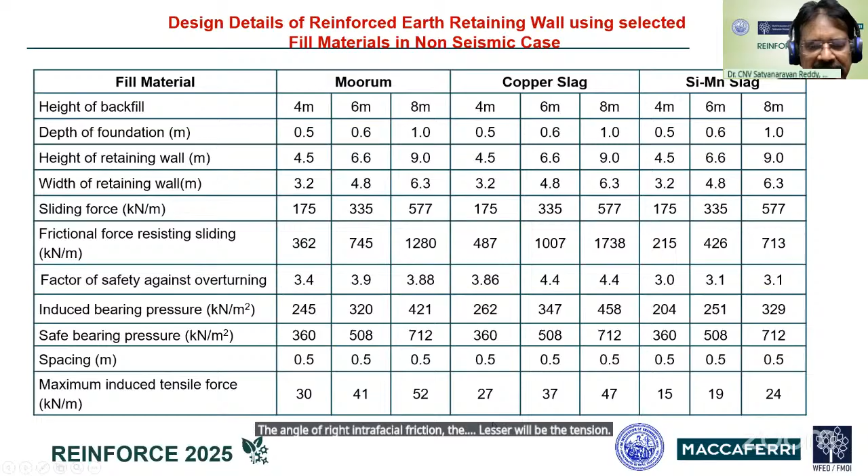So coming to induced tensions in the reinforcing layers, maximum induced tensile force in reinforcements — you can see for a given height, silico-manganese slag has resulted in the least tensile force, and even copper slag, though it is a heavier material, has resulted in lesser tensile force. This is due to its better frictional characteristics. So the tension induced in the reinforcing layer not only depends on the unit weight of the material, but also on its frictional properties. The higher the angle of interfacial friction, the lesser will be the tension induced in the reinforcing layer, and the higher will be the pull-out resisting force generated.

So coming to the seismic design pertaining to zone 2.

So very marginal differences have been noticed. Not much change in the design parameters were observed. So whatever initial proportioning that is done for a non-seismic case was observed to hold good for seismic case also. However, a slight increase in induced tensions were there. Even here also, silicomanganese slag yielded relatively lesser induced tensions. Even bearing pressures showed the same trend.

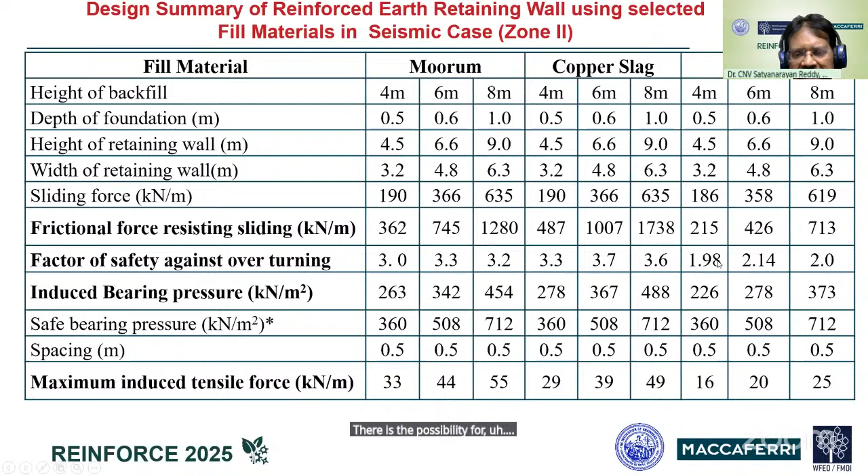So look at the factor of safety against overturning. For silicomanganese slag at smaller heights, the factor of safety against overturning has gone below 2. That's why whenever we are using lightweight material and doing design for seismically active zones, it is better to also check for overturning, since there is a possibility of risk against overturning failure.

Based on the design of reinforced retaining walls performed for non-seismic and seismic conditions using conventional fill material Moorum and industrial byproducts silicomanganese slag and copper slag, we can draw the conclusions listed here. The gradation characteristics of copper slag and silicomanganese slag satisfy the requirements of frictional fill material, particularly satisfying the criteria specified in IRC special publication.

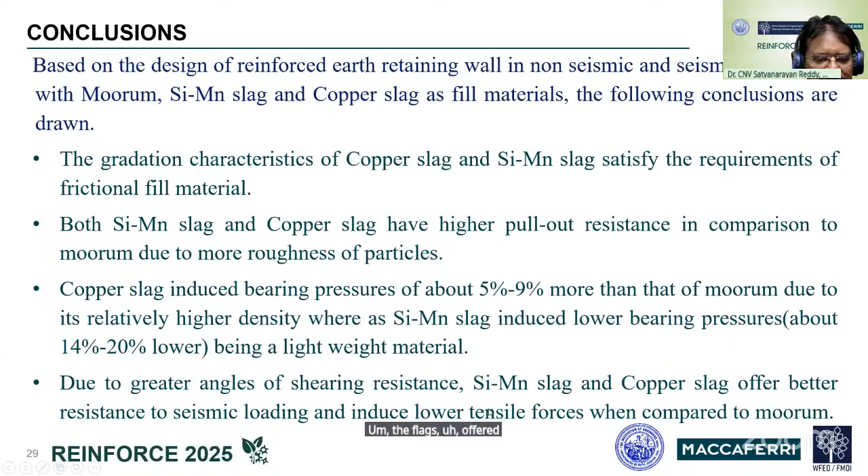Both the slag materials have higher pullout resistance compared to Moorum due to more roughness of the particle surfaces. Copper slag induced bearing pressures about 5 to 9% more compared to Moorum due to its relatively higher density, whereas silicomanganese slag induced lower bearing pressures by about 14 to 20% as it is a lightweight material. Due to greater angles of shearing resistance, the slags offered better resistance to seismic loading and induced lower tensile forces compared to Moorum.

Non-seismic designs of reinforced soil retaining walls under study are adequate to withstand the seismic loading of zone 2. In highly seismic zones, zone 4 and 5, a slight revision in design parameters will be required. But in zone 2 and to some extent zone 3, you will not find any significant change in design requirements.

The induced tensile forces in reinforced retaining walls with copper slag are observed to reduce by about 10 to 13% compared to reinforced walls with conventional fill material Moorum, in both seismic and non-seismic conditions. Similarly, for silicomanganese slag, the reduction in induced tensile forces was up to 50%.

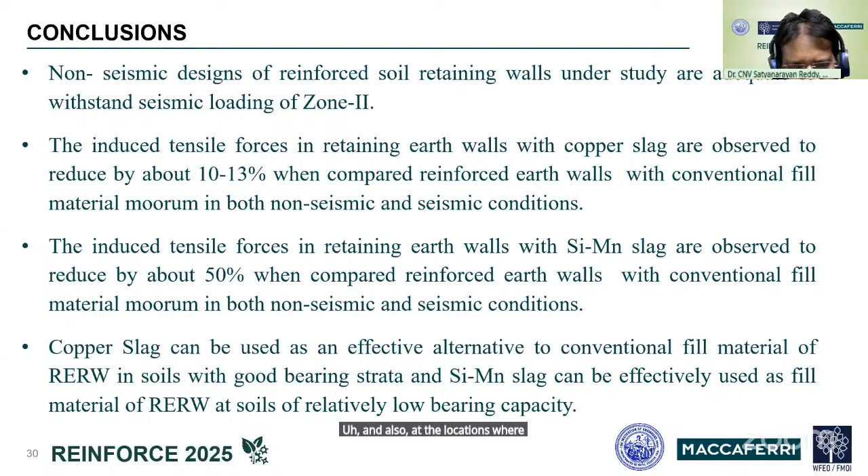So what we can say is you can consider using copper slag as an effective alternative to conventional fill material where you have soils with good bearing capacity. And you can consider using silicomanganese slag particularly for building reinforced retaining walls of larger heights, and also at locations where soils have relatively lesser bearing capacity.

So with this, I close my presentation. If there are any questions, I'll be happy to answer.